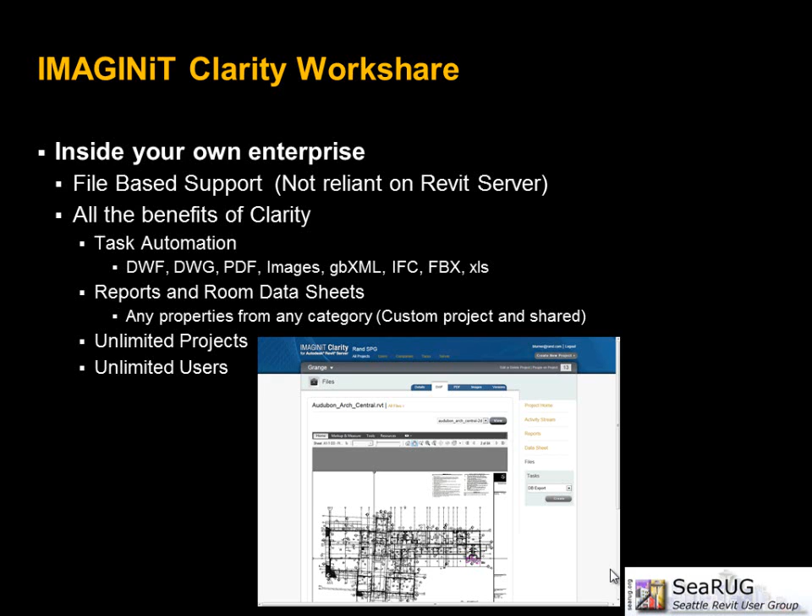Last time, I only showed one feature, and that was using the security portion of Clarity to control the Revit server. Because Workshare doesn't need Revit Server, that security piece has become less important with the Workshare version of Clarity, but I do want to show really quickly what Clarity is, more so than I showed last time.

First, Clarity is 95% a web portal for non-Revit users to access BIM information from your Revit files. I'm going to quickly log in as an administrator. While I do this, just take note that anything you're seeing can be accessed from anywhere you have an internet connection.

So here, I'm in as an admin, so I have access to everything right now. All my projects, I can edit, change, create, add, delete, anything I want. But what I want to focus on right here is our users and our projects. So right now, notice on my Clarity site, I have 4 projects running.

Maybe I have a user or a project manager that is only working on one project, and I don't want him messing with my other projects. That's one thing Clarity is able to take care of. I can come in and say, alright, this Bryan Cowles user is a little shady, I want to limit his visibility. Notice I'm only allowing him visibility to this one project.

Now, if we were using a Revit server, when I went into Revit, that's the only file I would see. I wouldn't see the other 3 projects. But because I am not using Revit Server in this instance, I'm just controlling this user's visibility inside of Clarity.

So I'm going to come up here, log out, and log in as that user. Notice that my interface is different. I don't have all those tabs up top. I'm not an admin, I only have access to view project data.

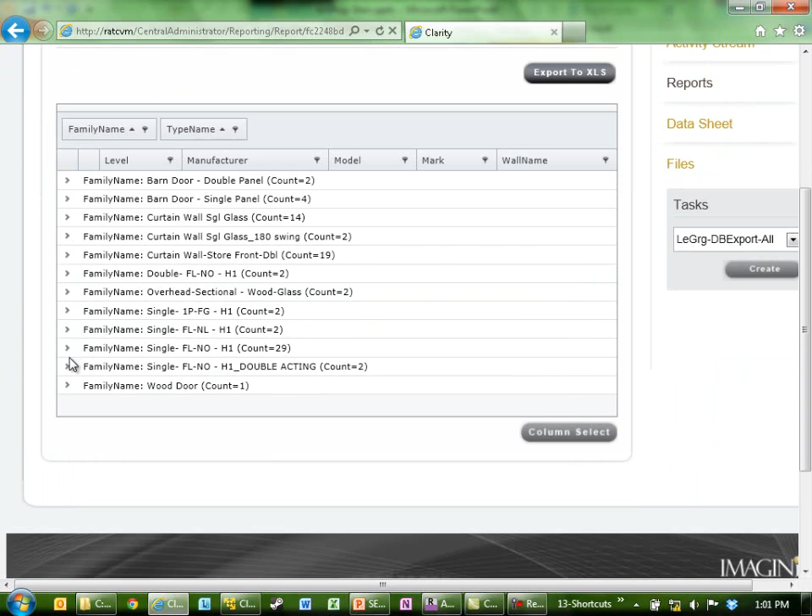So when I go to this architectural file, I can come over here and look at reports. This is the data from Revit. So if I wanted to look at a door schedule, here's all the doors that are in this project right now. I can expand these, expand further, and see all the information. This is read-only, it's not editable, but it is manipulatable.

So I can actually move properties around, sort by specific properties. I can come down here and grab more properties. So if I wanted to include fire rating, I'm just going to drag fire rating up here. Now I'm getting the fire rating of this component. Anything that I want to grab, we can use out-of-the-box properties, custom project properties, shared parameters, anything in the file we can pull out.

I'm also going to come up here and maybe look at a room schedule. So here's my room schedule.

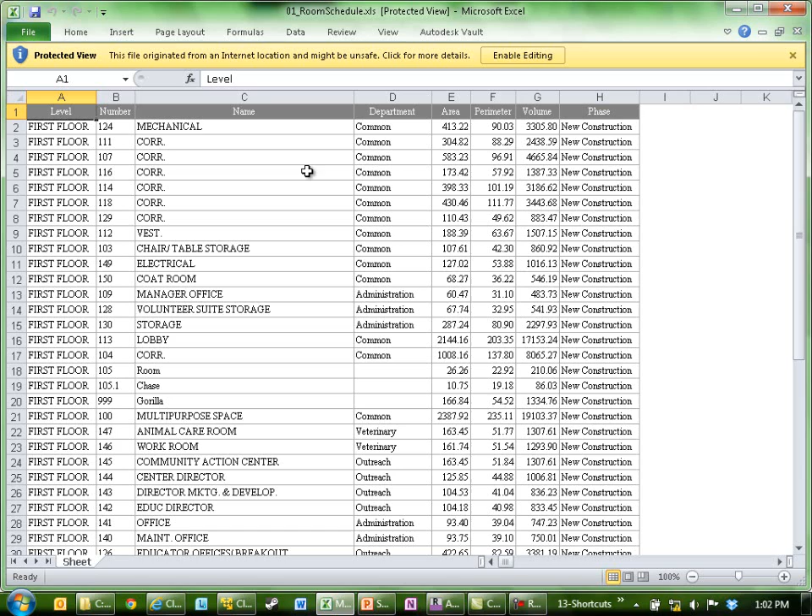Like I mentioned, the data is manipulatable. I can come up here and export this to Excel if I wanted. If I wanted to give this to someone who wants to do some analysis in Excel, I'll just hit open. And here's now a full room report from my Revit project in Excel that someone can analyze or do whatever.

But like I said, you can also just do straight manipulation here. If I drag department up, notice it's now grouping everything by department and giving me totals. So my administration is 1,212 square feet, and there's all the rooms in administration. Very good, easy access to data.

Data sheets. Who here does room data sheets? A couple people. Well, hopefully this is impressive either way. If I click here and say I want to look at my data sheets, I'm pulling these from the Revit model. As the Revit model updates, I can get this data update. It gives me an image of the room, all the properties from the room, finishes, square footages.

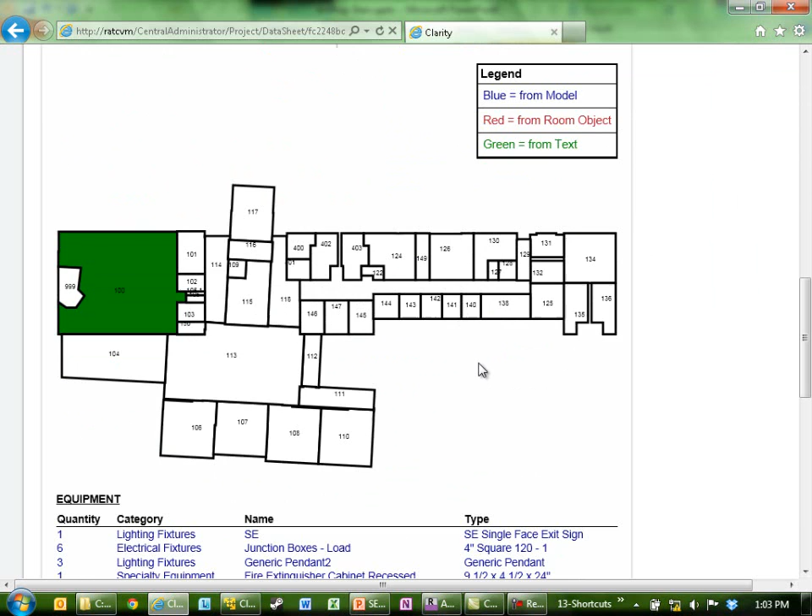We're tapping into linked files as well and pulling out what's in this room. So I have 6 power receptacles in this room. If I continue down, how about a convenient key plan highlighting where that room is? What equipment is in this room? What doors service this room? What furniture is in this room?

Again, this is all customizable. If someone is pestering me for sheets, I come back here to my architectural home and say, well, let's look at these PDFs. We are automatically generating these PDFs. Who here spends more than an hour a week exporting PDFs, DWFs, DWGs, etc.? This is all automated. I told it to do it every night at 1 a.m.

It spits this out, puts it on the site. Now someone can self-serve themselves, find the sheet they want, save it locally to their iPad or whatever device they have, print it directly from here. We're just giving these users access to this information without them needing to open Revit or bother a Revit user. If I come here to my DWF tab...

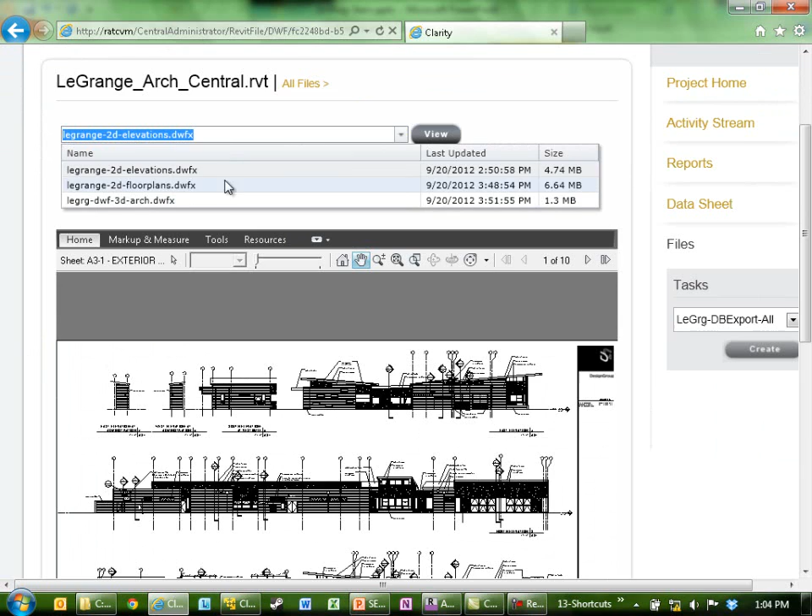I can look at these in DWF format. I can actually do separate exports—elevations, floor plans, a 3D DWF. And all I need to do is just click that I want to view these. We've embedded the full Design Review plugin in here.

So I can flip through sheets, zoom in on things, use my measure and markup tools, and say, all right, how wide is that door—there to there—36 inches, great. I can use the select tool and pick on stuff and see all the BIM data associated with these objects.

That's all I want to show right now, but we have the ability to just go in and say, hey, I realize the model changed today, I want to re-export everything. And I hit create. It's going to re-export everything, and in about 5 minutes, everything on this website is going to be up to date to the most current version of that Revit file.

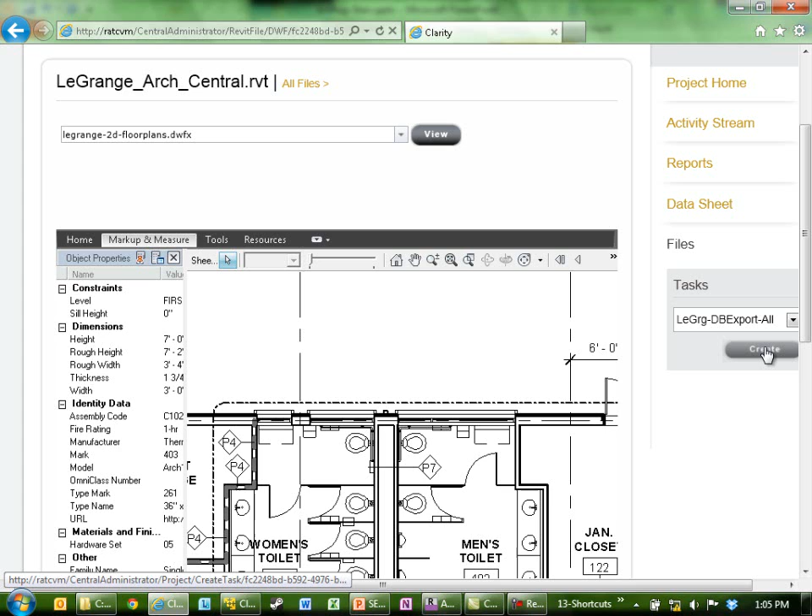So thank you for letting me go on a little bit about that tool. The big thing I wanted to point out is we are no longer reliant on Revit Server as the base of our technology. We can do this with any Workshare-enabled Revit file.

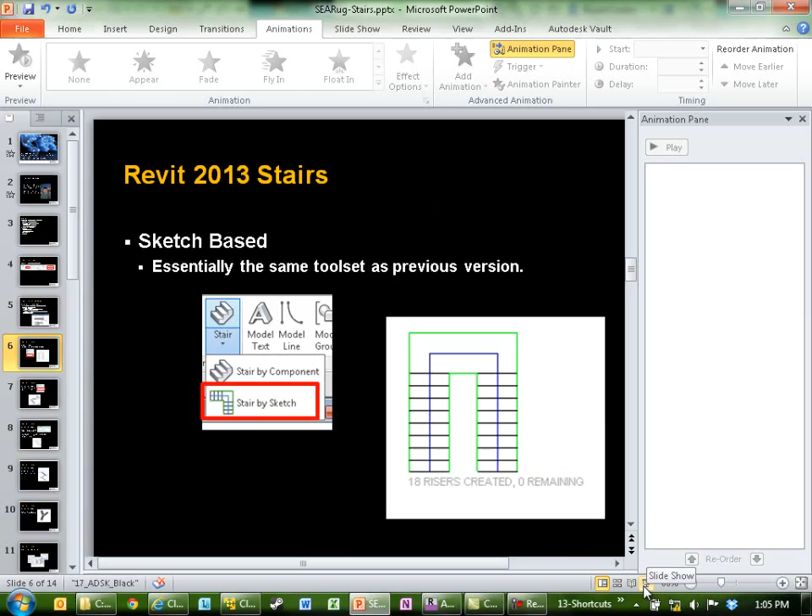So there we are. Let's jump into stairs, shall we? In 2013, the stairs tool got a pretty big overhaul. It has new component-based functionality that allows us to individually create and edit risers, runs, landings, stringer supports. Also go in and start manipulating very specific elements of the handrails. It's getting very, very good.

The image Rob showed earlier made me chuckle. It's not that bad anymore, but it is a lot better. We have a lot more customization abilities and control over what we've got in these.

So before I get too deep into the component-based stairs, I do want to point out that right here is Stair by Sketch. And when I pick Stair by Sketch, you'll notice it looks exactly the same as the old functionality. They didn't take that away and force you to use this new tool. They left the old functionality in there, so if you're comfortable with that, and not ready to adventure into the component-based stairs, and you need to get a stair out really fast, you can still use the sketch-based tools to get this information into your model.

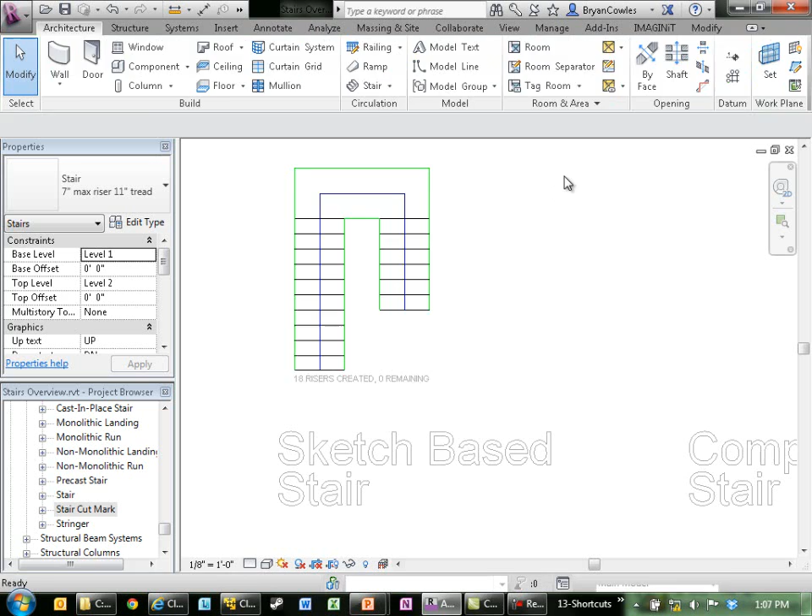Once I do this, I want to point out a couple of things. When I make a sketch-based stair, it is just like it always was. Notice if I hover over an object and hit tab, I don't know if you can hear that, my computer's yelling at me saying, nope, there's nothing else to select. I can select the handrails, but that's about it.

So this is where we can now move towards, oops, where's my slideshow? There it is. To this component-based tool. Now this is going to have a lot more options than you're probably used to seeing, and I'm going to try and cover as many of these as I can. Just like my presentations always are, if you've seen them, I like to start out basic and try and see how complicated I can get by the end of the 50 minutes that I've got.

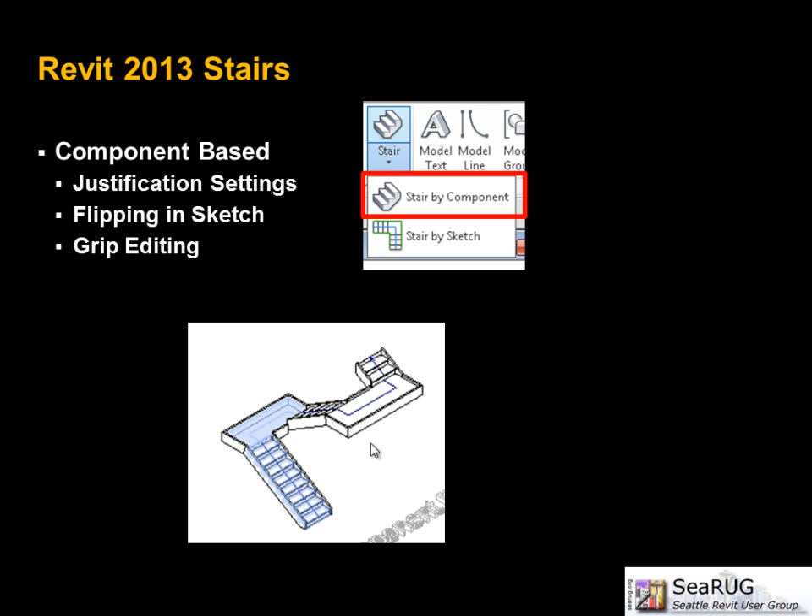So, stair by component. When I pick this tool, I just want to come up here and just show, just right here, stair by component. Pretty simple. It's right there with the stair tool. One of the first things is right here, location line. I can pick this right off the bat. I can't do that in the sketch mode still. But when I'm in this, I can say, I want this justified on the left side. If I know I need to follow a wall, well, put it to that side and follow the wall.

Now, as I go, some of these get squished up here. Notice we have very specific areas that we can look at. I have a run, a landing, and a support, so that would be my stringers.

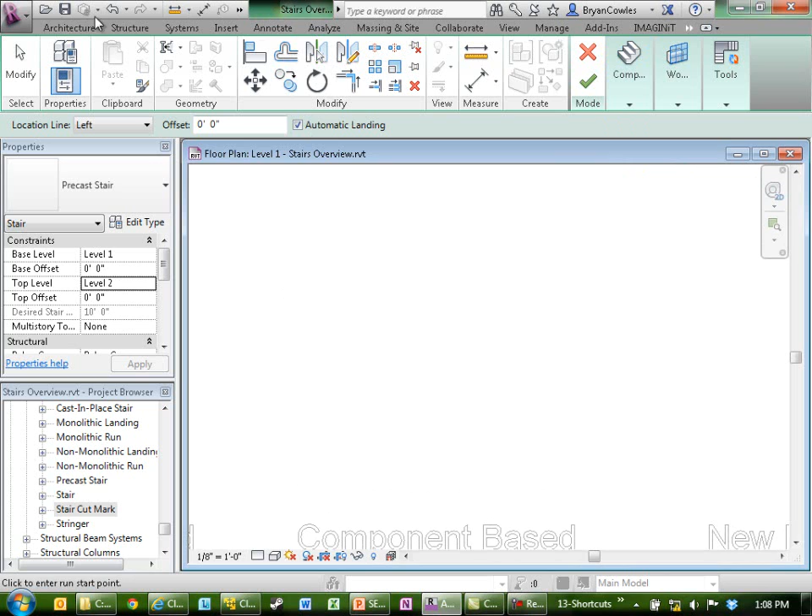As I sketch now, I'm going to leave this checked for right now, automatic landing, and I'm going to, let's open up a 3D view as well, because this is also something that is slightly different in the component-based sketch, is I'm going to get real-time results in 3D. So notice the first pick that I make, and the first run that I draw, it already is creating that as a 3D component. The next place that I pick, notice it's giving me a real-time preview of how it's going to treat this landing right now. So if I'm not liking it, I can kind of tweak and play with it, hit escape, and maybe try something else I forgot.

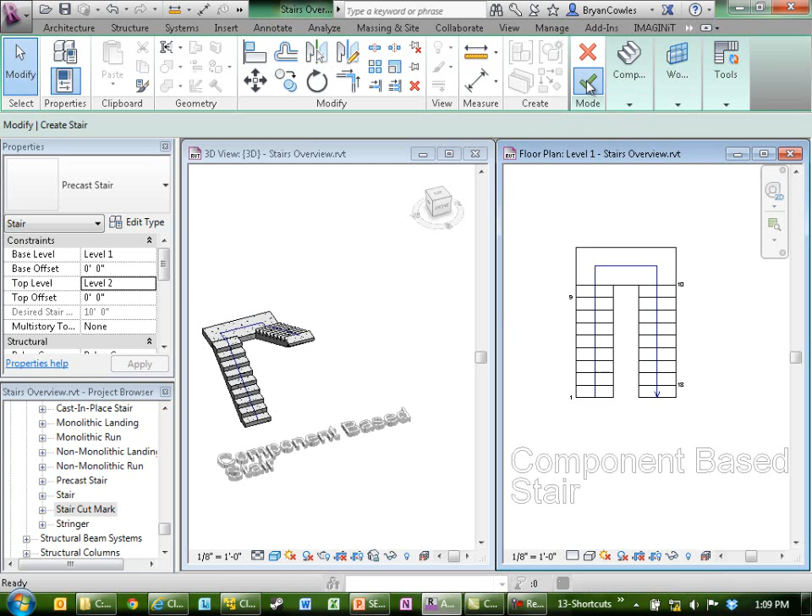I'm left justified there. But again, as I go, I just have all this visibility into what it is I'm actually creating. I didn't even finish the stair yet, notice. But I am immediately seeing different results as I go forward. Once I come up here and finish this stair, now it's going to go through and add the railings, anything like that.

Now, notice when I come in here, I can select individual pieces. So I can select just that run. Hit tab, select just that landing, and start to edit different properties and areas of these components. If I scoot over a little bit,

do another stair by component, and say an assembled stair. Oops, I keep forgetting I'm left justified. If I use this assembled stair, there is very convenient grips now that I can use to edit this. If it didn't make the landing wide enough, I knew I had a wall back here, well, I can just kind of grip edit that object now. If I grip edit this over here, notice it's individually editing the landing itself. So you do need to be aware of some of these differences as you're editing these.

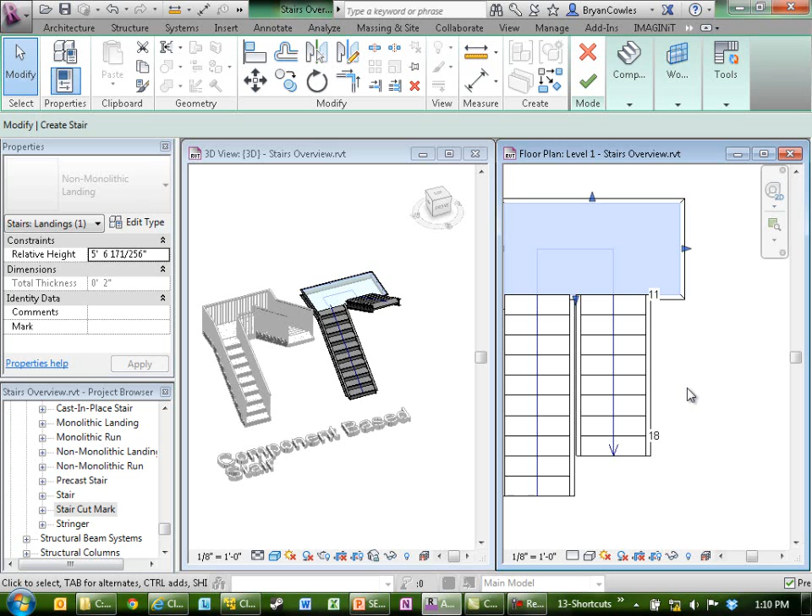Now I just need to grab the stair here, and notice it's also got a convenient stretch grip, but this is another thing that will get you. When you edit the actual width of the run, it pushes the landing out with it. This caught me off guard a couple times. That's why I wanted to show you that these are some things that you may get hung up on as you're working. In that case, I'm just going to come back in here and simply stretch that back. So again, very easy, very simple to just start manipulating some of this geometry.

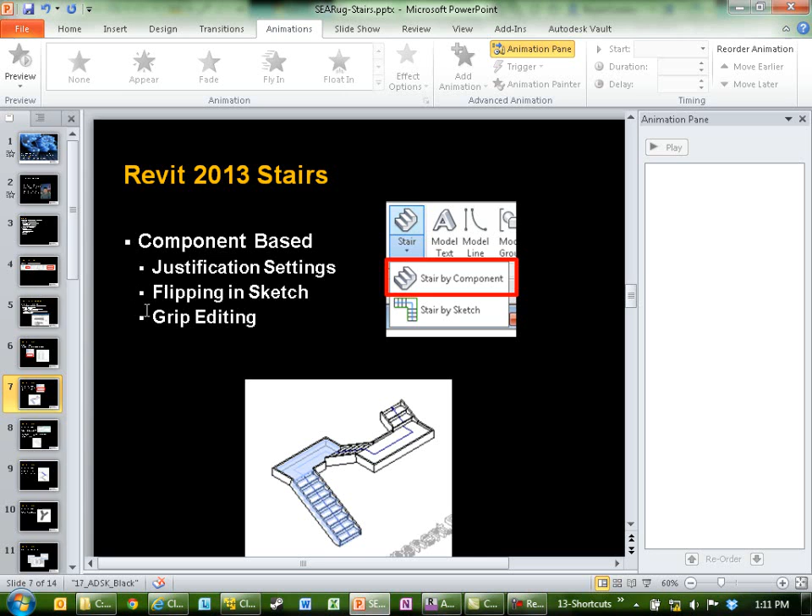So again, that's some of the very basics of this functionality. Something that's nice, I kind of skipped over it here, I forgot, to be honest, is you can actually flip the stair while you're still in sketch mode. As you noticed, I was able to see that 3D model going, and if I realized, well, my up is down and my down is up, I'll just go ahead and show where that's at. Right here, flip.

And again, it's just going to flip that. And again, I'm still in sketch mode. I haven't finished this stair yet. So again, I can just come up and go to these tools and flip that stair. Go ahead and hit finish. This is where it's going to finalize the stair, create some handrails. Apparently our line's too short. I'm going to guess it's that little piece right there. That's fine. All righty.

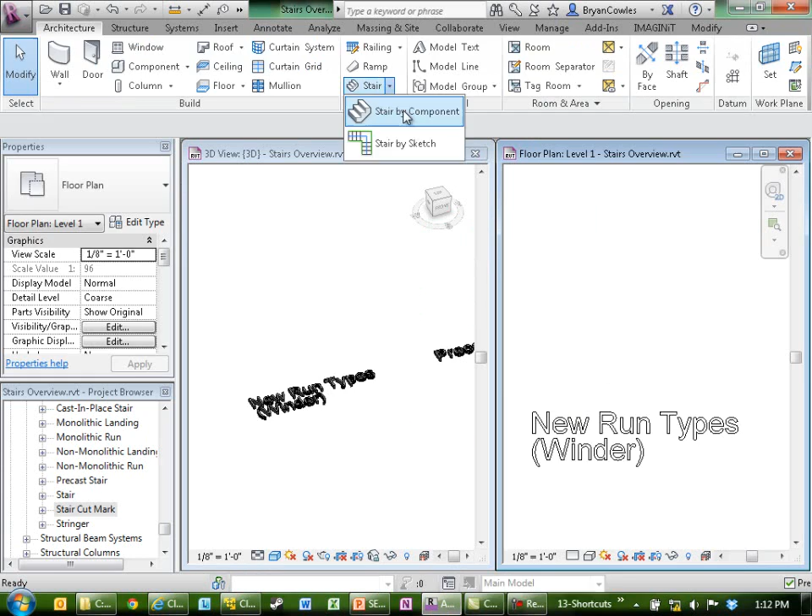Let's take a quick look. When I go to my stair tool by component, I can see I have an L-shaped and a U-shaped winding stair. If I pick the L-shaped, it defaults to equally space that stair.

Now when I go ahead and place it, I could use my spacebar to rotate or align tools. As I grip edit this, notice it's pulling from both sides. So if I needed to misbalance this and have less at the bottom and more on top, I just grip edit and it automatically pulls and retracts those stair conditions. If I needed to flip this, I can flip it before ever finishing the sketch.

As I continue, notice it does a little bit of a goofy thing here. I was wondering why it's doing this. It's trying to keep as many of the risers as it can in line with some center point out here, so notice these stairs aren't parallel as we're going through, and that's a little annoying.

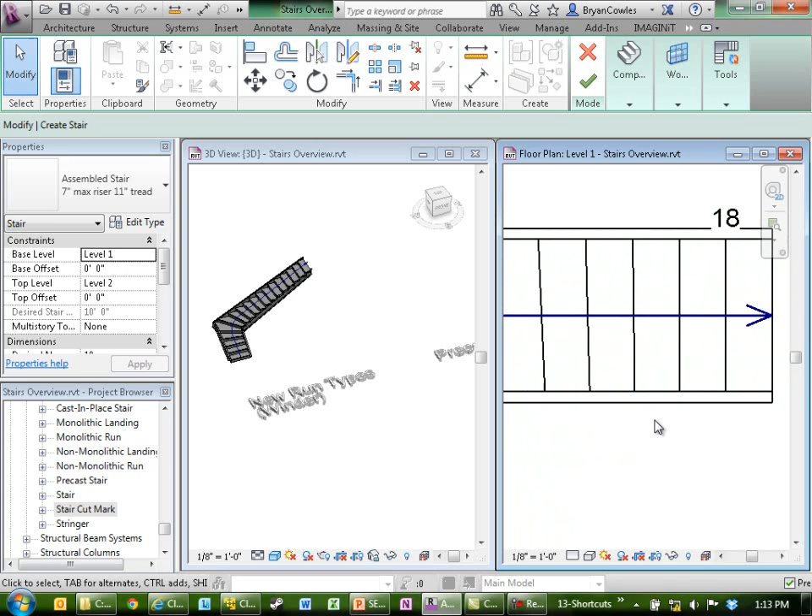But it's just a matter of selecting the stair itself, and in my properties I can put in a minimum width, which is what it's trying to achieve - it's trying to keep a minimum width as it goes. That's why some of them are getting angled.

But I have these parallel treads at the start and at the end. So if I know these last 8 stairs need to be all parallel, I just come into here - let me select my run - and say my parallel treads at the start, at the end I want 8 of them. There we go, now my 8 are parallel, and then it starts into the winding portion of the stair.

So that's another little property that's going to catch you if you're wondering why all the stairs are at an odd angle - that little property there.

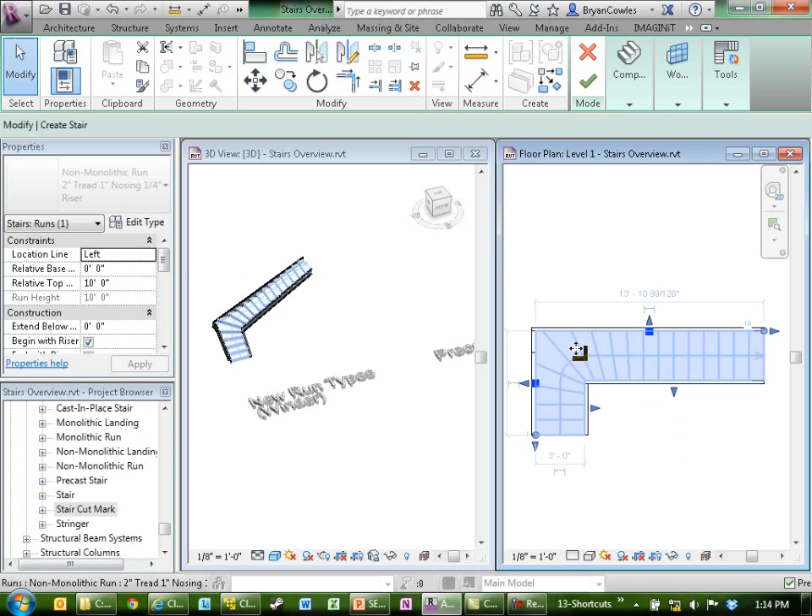Another trick: notice when I have nothing selected - I've hit escape a couple times like any CAD or BIM user is apt to do, hit escape 12 times more than necessary - when you don't have anything selected, those properties aren't here, so you'll be looking for them and won't find them. Make sure you come in and select the component of the stair you're wanting to manipulate. I come in here and those are the properties that I want.

Now as I come in here, notice it gave me just a 90-degree corner at my inside corner. This is another property where I have to select the run, and I can come in and say I want a fillet on the corner. Once I activate that, I can specify the radius that I would like.

I put too big of a number, let's try a little smaller, 18 inches. Oh, still a little bit too big. I'll just try 1 foot then. There we go, so now I'm able to quickly put a radius on that inside corner.

So a couple of these properties you may not realize right away because you don't see them unless you actually have the run object selected.

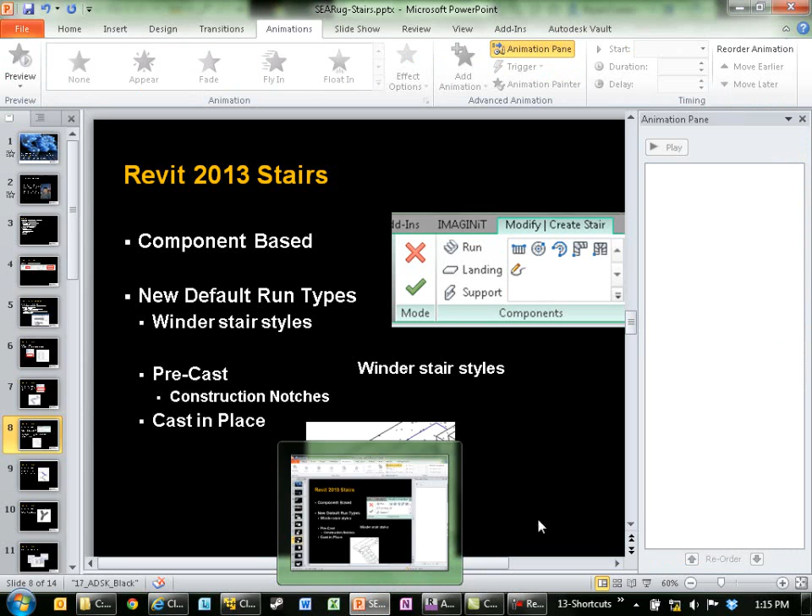All right, now back to the old PowerPoint. So those are those winder stair properties. You'll notice very similar properties if I did a U-shaped winder. I'm low on time, so I'm not going to go through that one.

We do have a couple of new stair types, and these are only applicable if you are using the component-based tool. One of them is - I actually forget which one it is - if it's precast or cast in place. We'll go ahead and peek at that.

Finish. There we are. Well, it's just Revit's way of saying slow down, be patient.

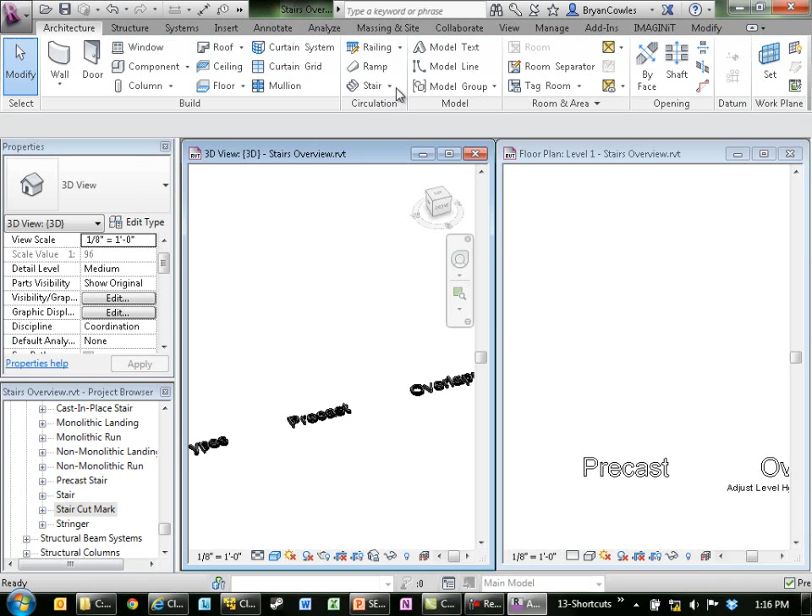Right over here, we're going to look at the precast type. I mentioned that not all of these are available in the stair by sketch, so I'm just going to show this really quick. If I go stair by sketch, notice I have just stair, and it's giving me a monolithic and my typical assembled 7-inch rise, 11-inch minimum tread stair. If I were to do stair by component, notice this actually has very specific stair family types. I have the assembled stair, which is the 7-inch rise, 11-inch tread, but I also have a cast-in-place stair and a precast stair. Now these ones each have a couple of additional properties that we can use and manipulate.

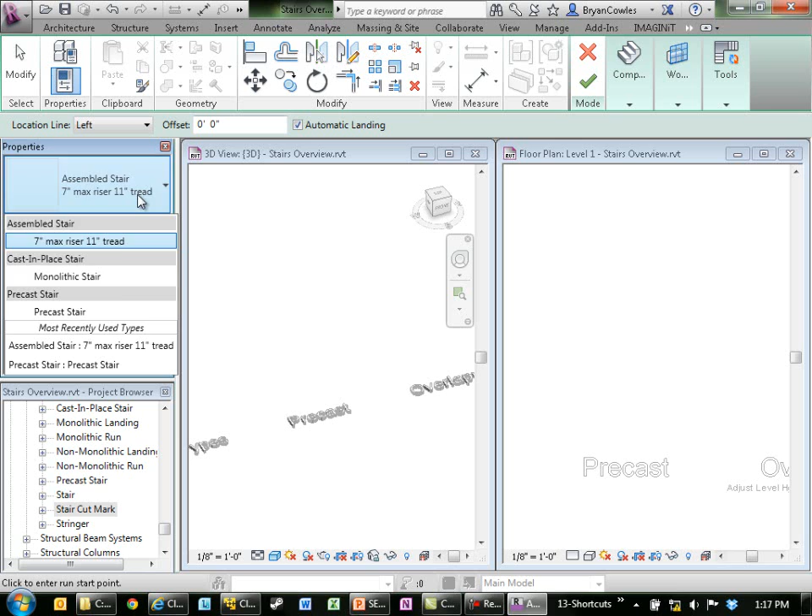So if I came here and said, all right, I want to do this precast stair, and I'm just going to kind of do a quick U shape. Oh, I left it on assembled stair, thinking there shouldn't be any stringers on that. Precast. Run. And come up here.

This one actually has a little bit of a notch condition at the top of the stair. Now this is on by default. I can quickly turn it off. I can also adjust what side I want it on, top, bottom, both, just by going into these properties, allowing me to have that little bit of extra detail about how the construction is really going to happen.

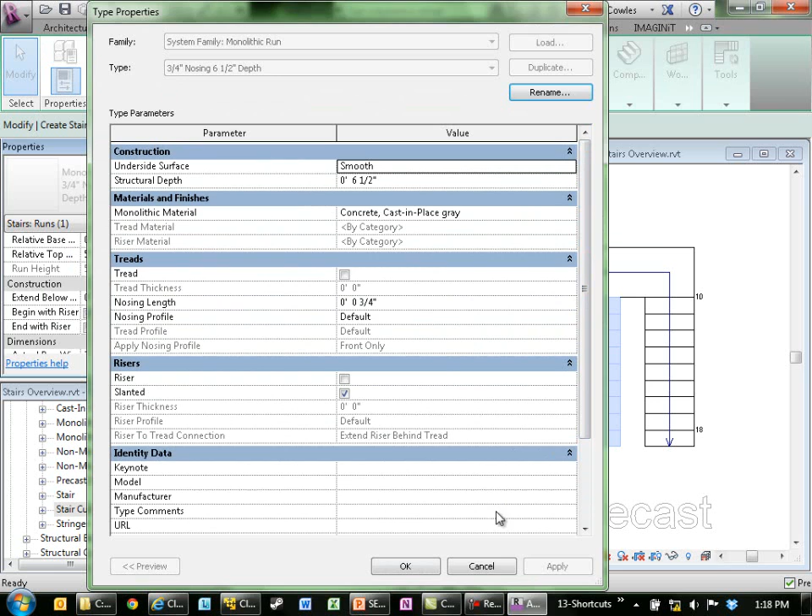All I need to do is come in here and say edit type, and maybe it's not the type properties. Oh wait, this is a full stair property. So these are the things that are going to get you. The last set of properties I showed, I had to select the run. This one, I have to have everything deselected, because when I come here to edit type, here's my notch conditions.

Do I want a straight cut? Do I want it notched? What size, what thickness, what extension distance? Do I want one, what my gap distances are? So we have all these different properties that we can start to examine, look at, and manipulate.

The real trick here, as you've seen, is do I do it with nothing selected, or do I have to have the run selected? Well, I found there isn't a good rule of thumb for either of them. You just need to experiment. Just realize if you're not finding what you're looking for, select something. If it's still not there, deselect something, and it will be in usually one of those two areas. So once I've done that, well, there it added another rail for me. And I can continue forward.

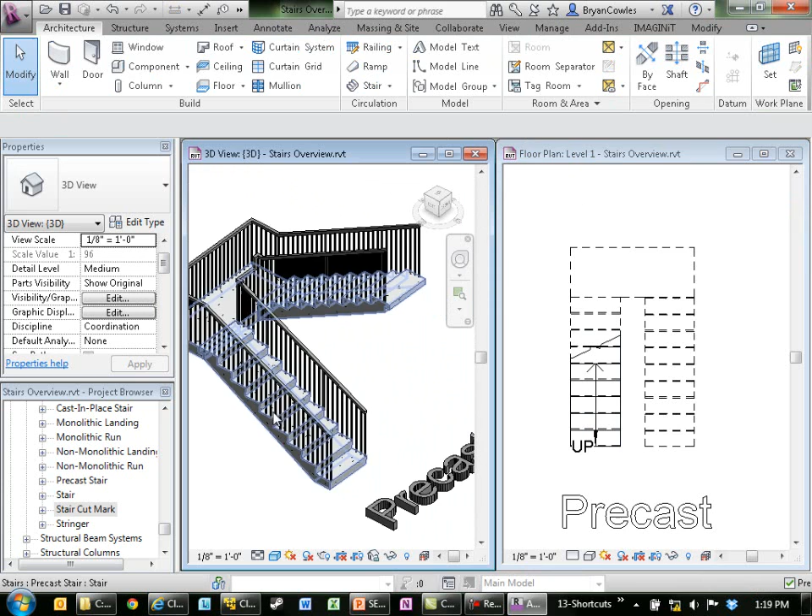So with stairs, and specifically these component-based stairs, we're no longer constrained to the 2D sketch and not being able to get a sketch above a sketch. Has anyone here ever tried to draw a stair that to get the full height had to wind on top of itself? So what do you have to do? You have to draw a stair and get kind of to the point where it's going to overlap and you stop. Then you draw another stair and make sure you've got your offsets correct and you continue the stair going forward. Well here, if you're using the component-based stair sketch tool and you know I need to go all the way up there, there's no landing between them, but I'm going to wind amongst myself, I can go ahead and do that and have overlapping runs.

The most difficult aspect of this in the old functionality was doing winding or spiral stairs, because those almost always will wrap upon themselves. And you had to do 2, sometimes 3 separate stairs just to make one stair. It made no sense. Now we can do this very quickly, very easily. Now I'm going to cover a couple topics with this one.

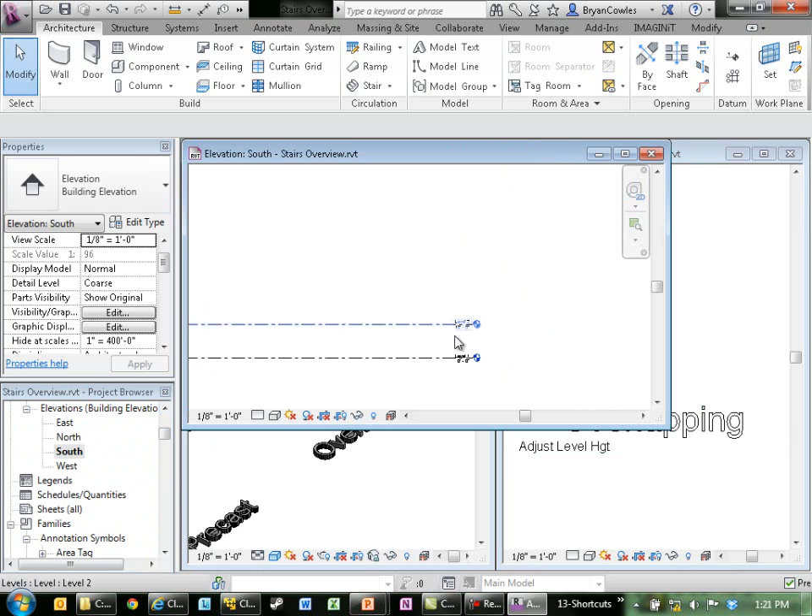When you have 2 runs, you can have Revit automatically connect them with a landing. Now this is a tool here that is just a checkbox that I want to get. So ignore the error I'm about to get, because I'm going to say that maybe this is an 18-foot floor-to-floor height. It's going to yell at me, I know it, saying my stairs no longer make it to the level. That's fine.

Or I may just crash Revit. I've come to find out whenever Revit goes gray and it says not responding, that's a code. That's a secret code from Autodesk saying, be patient. Be patient. That's the, hopefully it's going to come back. So there it is. So there's my not responding. There it was. Just be a little bit more patient, and here we go. So it's working.

Okay, so what I'm going to do while it's thinking, I'll talk about what I'm going to do before I do it, is, so that's fine.

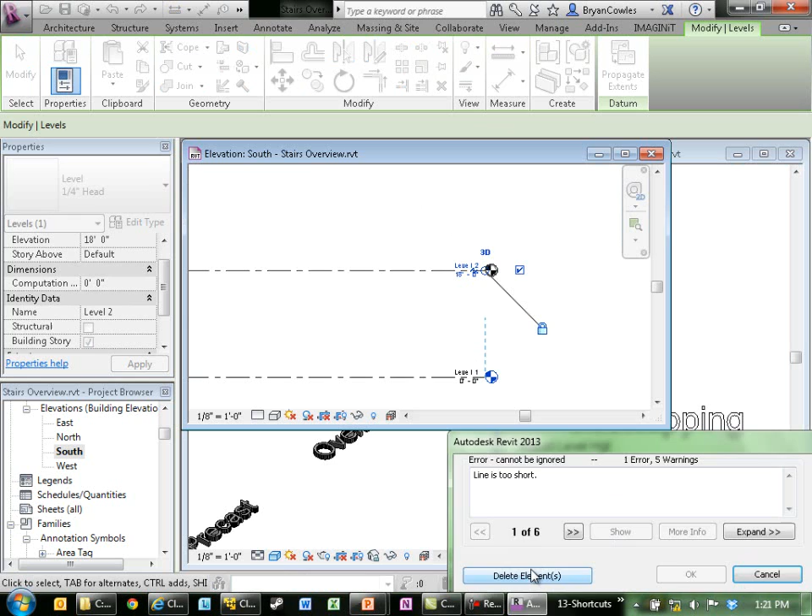Now, when I come to do this overlapping stair, I am going to combine two techniques into one just to save myself some time, because I still have, hopefully, a lot to get through here.

I'll just put this to center. Now, there is this checkbox right here for an automatic landing, and that's what it was doing before—it was assuming that I wanted a landing. If I turn that off, I can actually come in and draw a run.

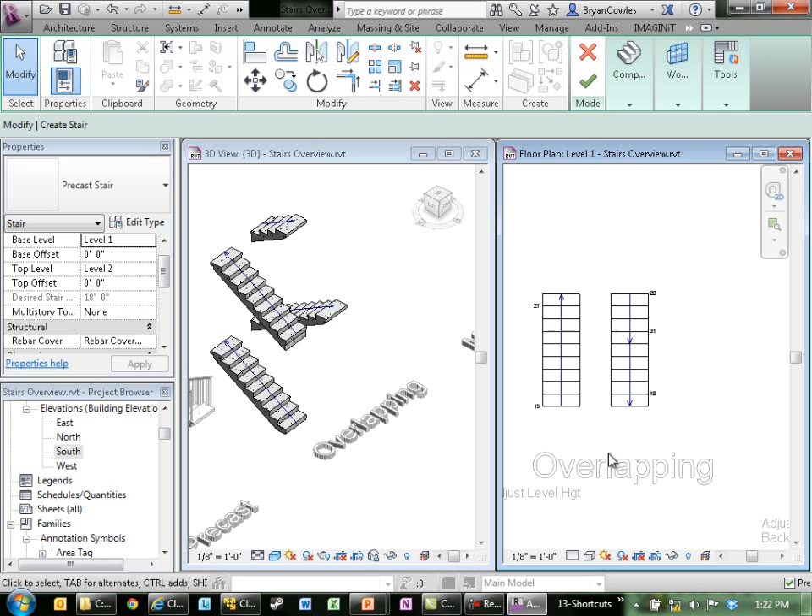And draw another run. Notice I can just come over here and draw another run, and come over here and draw another run. So it was able to just keep going. I didn't have to exit the stair, complete a new sketch, and start from where the old one ended—I can just keep on going. As you see, it just came in and stacked them all on top of each other here. So I've created a couple different runs.

I'm going to do one more thing to show you another gotcha. I'm going to go ahead and finish this, and I'm just going to add one more component stair over here, just something like that.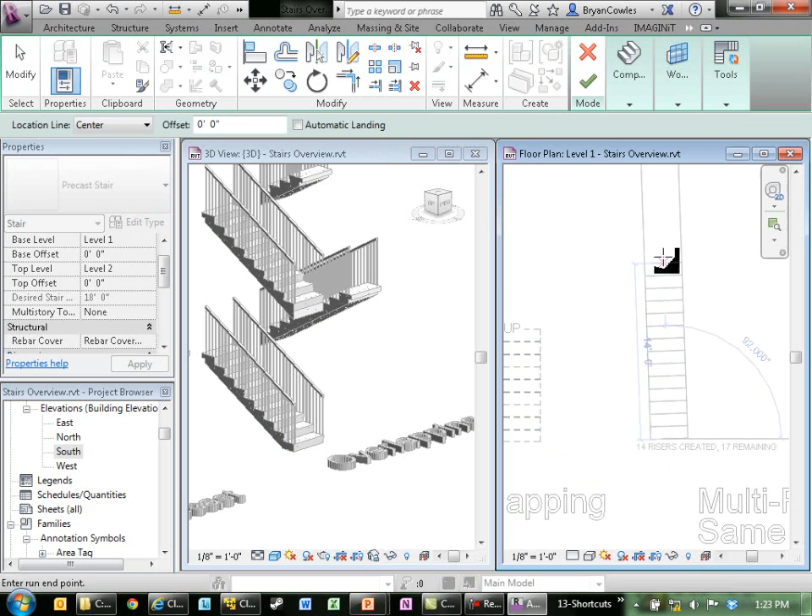Now I'm going to edit this first stair. So when I come in and say Edit Stairs, notice I still have all of these component-based tools available to me. The one I want to show here is landing. Now, in order for Revit to make a landing, it has to be in the same stair component object. So notice I couldn't create a landing between the bottom of this one and the bottom of this one—it won't let me do that. So that's a catch, just pointing out that's a limitation right now.

If they're in the same stair design, or the same stair sketch is kind of a loose term at this point, but as the same stair sketch, as long as they have either two tops that are the same or a top and a bottom that are the same elevation, I can just say I need a landing between that one and that one, and that one, and that one, and that one. Whoops, getting a little fast with my clicking. But you see, I'm just connecting different objects amongst themselves here.

So very nice functionality to kind of plan some things out with the original tool. Maybe limit what I'm showing right now. As we figure it out, I'll add in landings later.

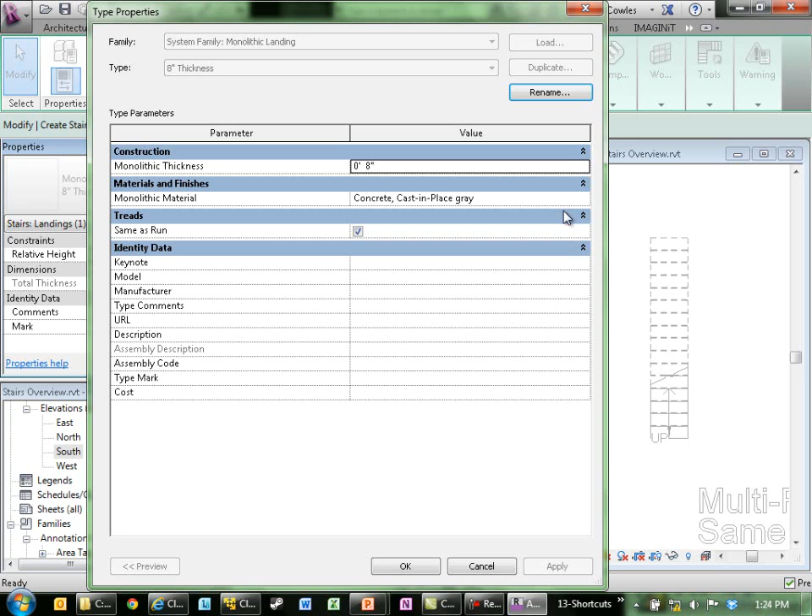And just to show, these landings are their own objects. So I can give them a different thickness at each landing if I needed to do that. I can give different material if I wanted. So again, these are all individual components as part of an overall larger component as we go forward.

So go ahead and finish that off, and continue forward. It's kind of giving me some handrail things saying I had to extend to meet, things like that, which we'll talk about in just a little bit.

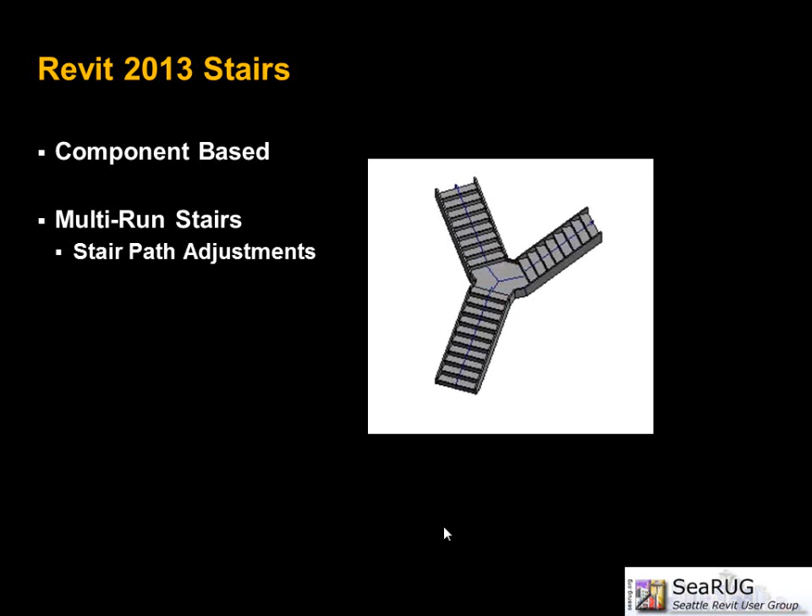So let's go ahead and delete this. Multi-run to the same level—so if you have essentially one stair system that is not just one set of stairs, it may be branches, or it's two that meet into one, we can still do this type of functionality within the component-based stair tool. With the sketch-based stair tool, again, you'd have to make two separate stairs and kind of play with the settings and this and that. But this is going to be initially created but then modified using a sketch.

So you can take component-based tools and convert them to a sketch so that you can easily manipulate them from there. So what I'm going to do is say I want a stair by component, and I'm going to pull this up, maybe say 10 there, pull this up, and I'll just go to there. That's fine.

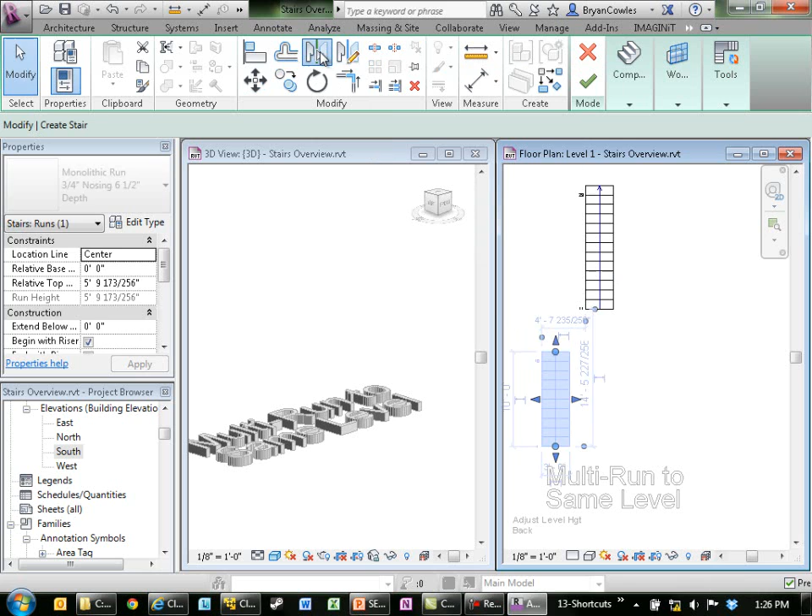And then I'm just going to grab this one and just use my basic modification tools. So I'm going to say, all right, I want to mirror this across that run. Notice it kept the tread counts the same—it didn't try to make this stair 24 going up. So I was able to take two separate stairs, and I just mirrored one of them. I could have copied it, anything like that.

Now I'm going to come up and say, all right, I need a landing between this one and this one. Now notice I can't say I also need a landing between this one and this one, or this one and this one—they already have their landing. So this is where I now need to say, okay, how am I going to get those two landings to meet with the big one? So this is where, if the situation applied, I could grip edit this one and be fine like that.

But this is the problem I'm going to have, and I actually did it with an incorrect stair type. If I did one that had stringers on it, left at the concrete stair, it would actually continue the stringer all the way through and up and over. So instead of just stretching that, here I'm going to come up and notice there's a tool that says convert. Any stair component I can convert back to its original sketch that would have been used to originally create this geometry. So I'm going to say convert.

Now, that error, I should have left it up. I clicked through it really quick, as I'm apt to do in Revit. Well, warning, I'll deal with it later - which, by the way, clear your warnings out every week at a minimum, just a suggestion. But once this is a sketch, I cannot go back to a component based stair unless I delete it and recreate it. So just be aware of that.

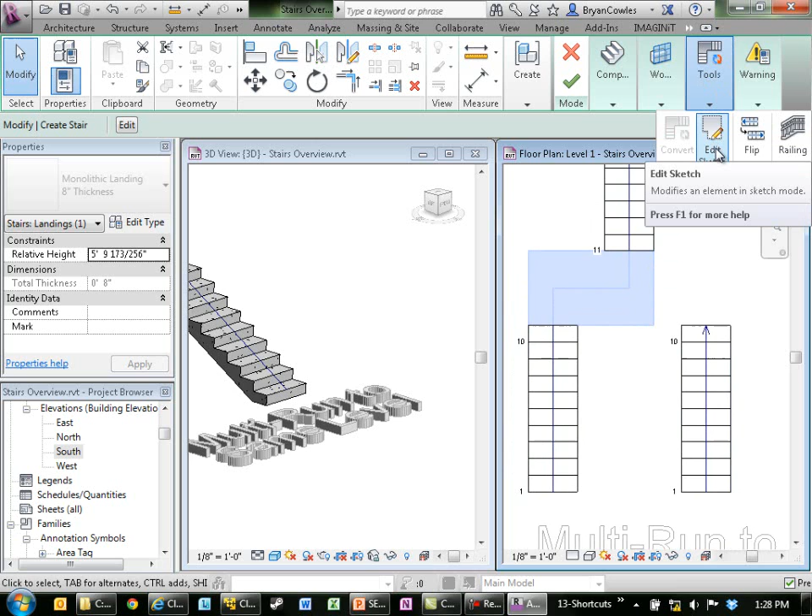Now that I have this as a sketch-based tool, I have the ability to edit this sketch. So now if I come through, I'm going to grab this and pull it over. Actually, I'm going to just use the Align tool - there to there. And trim, and finish.

I wish I would have left it at the assembled stair, because you would have seen that the stringers would have cleaned up at the top of that stair.

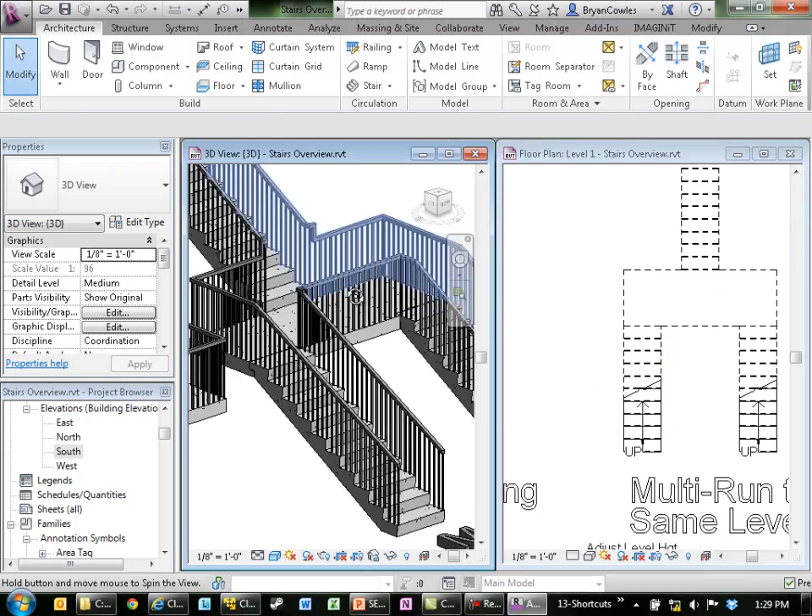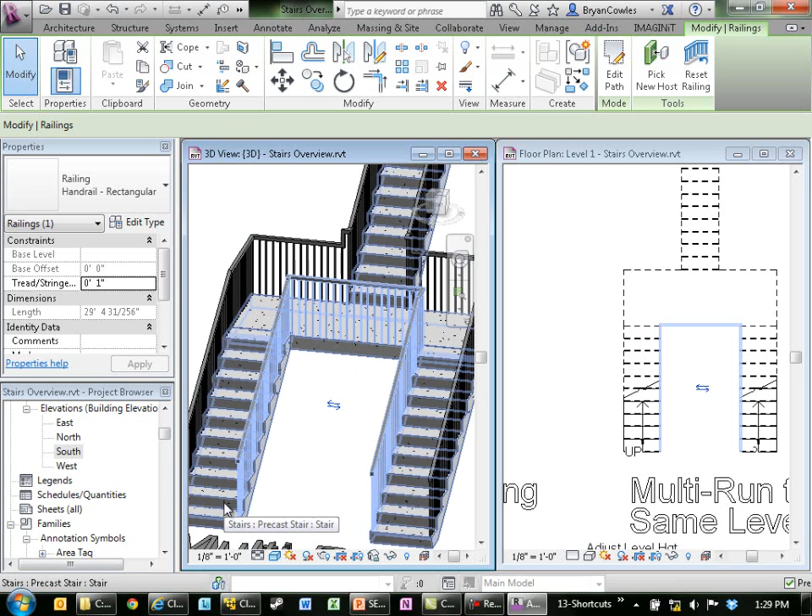Now, another thing that's kind of interesting is this run line. When I go ahead and finish this stair... I'm not sure what that error was. Oh, actually, this is a great example. So instead of showing it with the stringer, you can see it with the handrail. Had I done it that first way, the handrail would have been blocking the top of that rightmost stair. But because I switched it to a sketch, it realized that those two needed to stop, and notice it actually made this a continuous rail. They were originally two separate objects, but because they were all based on this one component-driven stair, it understood how to handle at least the handrail in these unique situations.

Alrighty, so let's see where I'm at. All right, stair path adjustment. So if I come in here and edit my stair again, right here on the run, if I pick there... I'm just going to, whoops, excuse me. When I pick run, right now the stair doesn't quite recognize this other piece over here, as you can see, and this can actually have some negative effect when you're trying to adjust the display settings of the stair.

If you wanted the cut planes to work properly, the different displays, hidden lines, or however you want to show your stairs, this can actually make this one on the right look a little different, and you may not want that. So what we'll need to do is pick - I need to do a new run, and then it gets into this boundary, riser, or stair path, and I picked run, and then the tool I picked was this one right here, sketch. So I'm going to sketch this, and there is this new one here called stair path, where I can actually say this needs to continue.

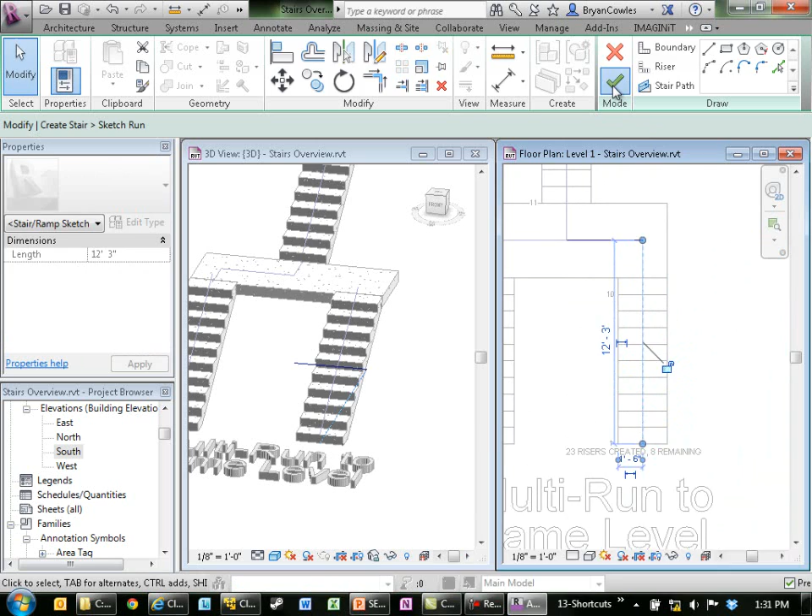Apparently I can't draw a straight line either. And we'll go ahead and connect those in. Go ahead and hit finish. Interesting. Need to pull that all the way down. Can't create this run by sketch. I must have missed - looks like I'm off just slightly. No, it's not snapping for me.

Well, as you see, sometimes live demos just don't work out for you when you're trying to do them quick. But this will help when it comes to manipulating how these stairs are going to look when I start altering visibility settings, visibility graphics, type properties, things like that.

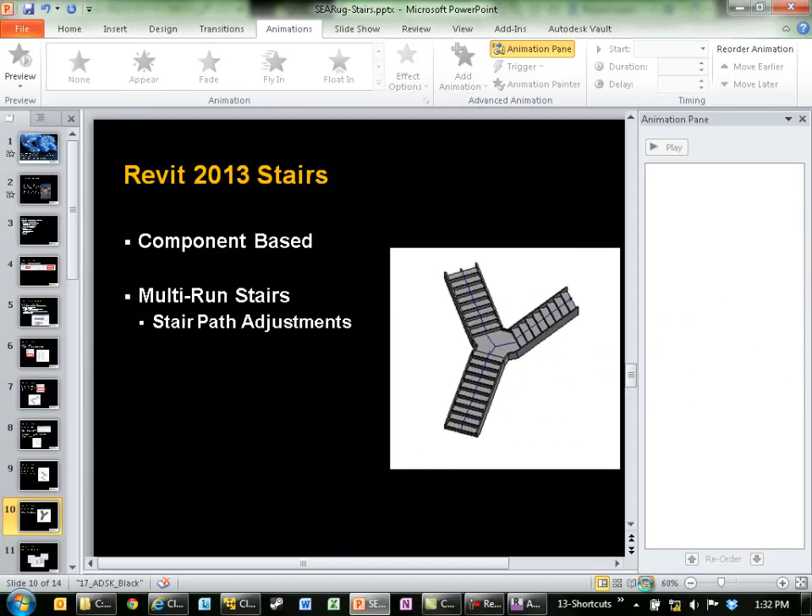Now, speaking of, I think that's my next topic. There are some new stair display settings, so we now have a little bit more control over how they look in our plans. Some of these are nice, some of these aren't - I wish there were still a little bit more, but we're getting better here. Some of these were user-generated, so I do recommend if you've got something that's just still driving you crazy, put them on that wish list, because these were actually a big item on the architectural wish list.

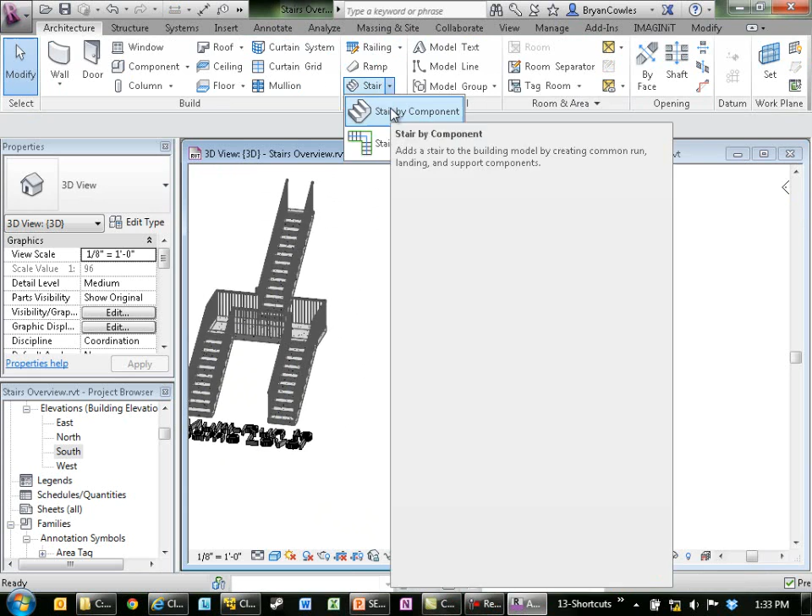First, I'm going to make a stair that's not the precast - stair by component, make an assembled stair, and I'll just throw it over here. It's a long stair, long straight stair, no landing. Code - who follows code?

So we have these new display settings. There are several of them. Some are in the model visibility graphics, some are in the annotation visibility graphics, and some are part of the type properties of the stairs. So they're all over the place. Let's take a look at these.

In my plan view, if I go to visibility graphics, on the model categories tab, this one's easy to find under the stairs category. There's this new series called 'above.' I can now individually adjust what things look like below the cut plane and what they look like above the cut plane. So I could say I don't want to see the riser lines, I only want to see the nosing lines, or vice versa.

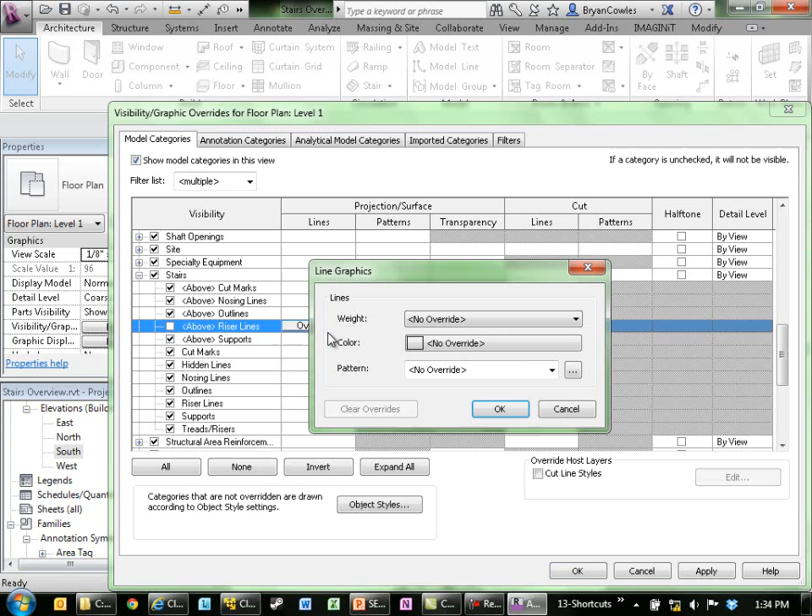I don't want to see the supports above the cut plane. I want to change the line type of these above the cut plane only. So I'll just make them red - some sort of change. Oh well, I turned them off and then changed the color, it figures. So I'll turn off the nosing and have red riser lines above there. So again, you now have these individual little tweaks and controls to adjust how these look.

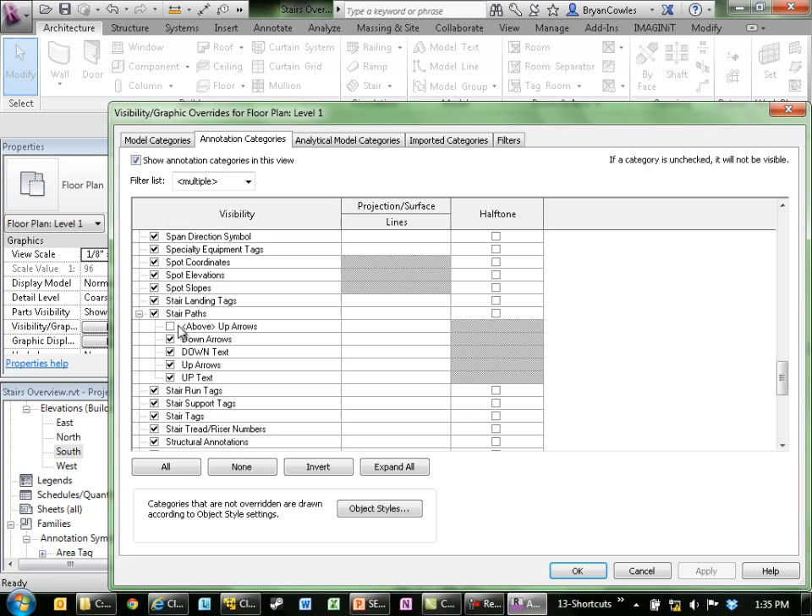If I go to my annotation category, there's one called stair paths. This is specifically regarding that path line. This is where that last step I was talking about can have an adverse effect if you don't adjust that stair run, because we're now looking at that path. So we now have above the cut plane, do I want the arrow to continue? This is just a simple yes or no, and it's got some basic overrides.

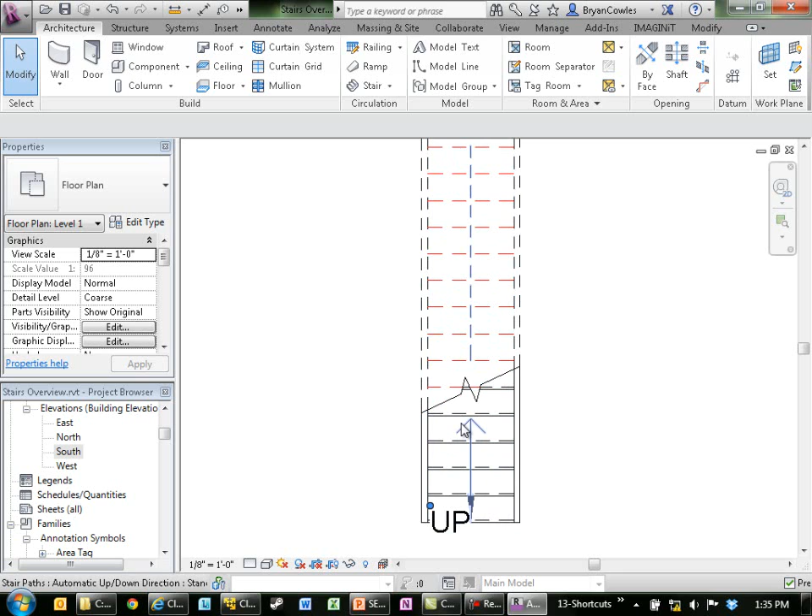But now you see, once it hits the cut plane, it continues with a different arrow. I can adjust what it looks like, what line types, anything like that if I wanted to match it. It's still a little annoying that it splits them here. If I wanted them to be continuous, I haven't found that setting yet. So it's 2 arrows instead of 1, but I can at least get it above this cut plane.

And there we are. The next one is in the actual type properties. So if I select the stair and go to Edit Type, we have this area called Graphics. Now I have single zigzag. The 2 that come out of the box are single zigzag and double zigzag, but when I dove in here, I'm thinking, oh, could I customize this? Yeah, kind of. You have 2 choices, a zigzag break or an arced break.

But you can also now specify the angles you want, how wide they are, the symbol size. And again, I mentioned you can have a zigzag or a curve. So I just made a new type for a double zigzag, one for a single curve. So now as I come through, I could say the cuts or the graphic style I want is that double zigzag.

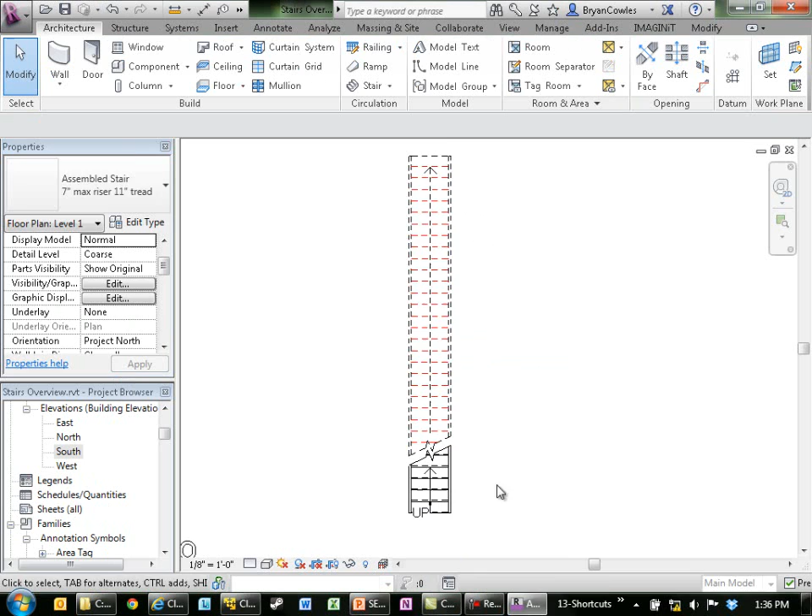So now you see it throws in a double break in there. Or if I select the stair, come back in here and say I want a single curve, you can see it gives me a little curvy break symbol.

I tried digging into the family tree to see how deep I could go in editing this, and I found that here is the stair cut mark. In the family tree, it's under stairs, but notice there's no edit family button. I was trying to say, could I make this whatever I wanted? So unfortunately, not right now. Maybe in the future. But we've got a little bit of customization there.

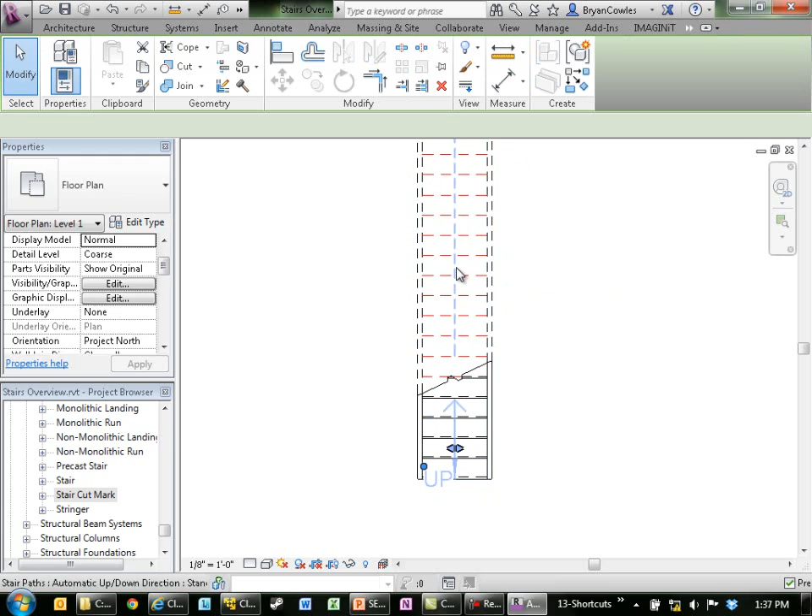The last one - this is a new system family, you can't really manipulate these other than the basic properties they give you, but notice I can hover over and hit tab, and I can actually select the stair path itself and start to manipulate how I want this to look. Where do I want the up text? Well, I normally couldn't do anything with this, either on or off, but I can say I want the up text up here or up here. I can just manipulate this wherever I would like.

I can come over here and say show the text. I can go to Edit Type and start to adjust, okay, what arrow types do I want? Do I want an open arrow? Do I want the arrow, instead of just being this much of the stair, do I want it to go the full width of the stair? That's what this little check mark does. So now you see my arrow goes the full width of the stair.

Again, just some of these things that are interesting. I added an arrowhead to the bottom as well. That makes no sense, though, because I'm now pointing two directions. Let me go ahead and say none.

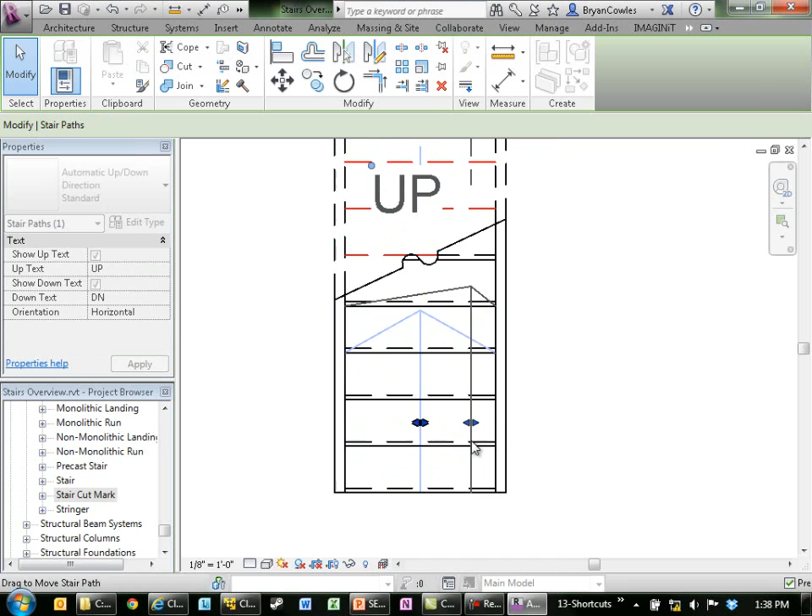So again, you have this manipulation. Also, if you don't want this centered, you can just edit this, although notice what happens when you have the full width arrow - it does some interesting things there. So maybe if you're going to have it off center, say I just want an 1/8 inch arrow there. But again, you just got these slight graphical manipulations that you can do to get these maybe feeling and looking a little bit more how you prefer them, or if you had something right there that you also needed to show, to not have overlapping lines or geometry.

So that's just some of the graphical settings that have been implemented into the new stair functionality. All right, so, whoops, wrong button.

Stringers. Who here has ever tried to use a C-channel profile as your stringers? Well, in 2012 and previous, it was a bear. In fact, the best way I found to do it in 2012 or earlier was to literally build a handrail that's at the bottom of the stair that goes up. That's really the only way you could do it, because you could only use a rectangular stringer. That's not the case anymore.

We can now use any profile family as a stringer now. We can also add or remove individual stringer elements on a stair.

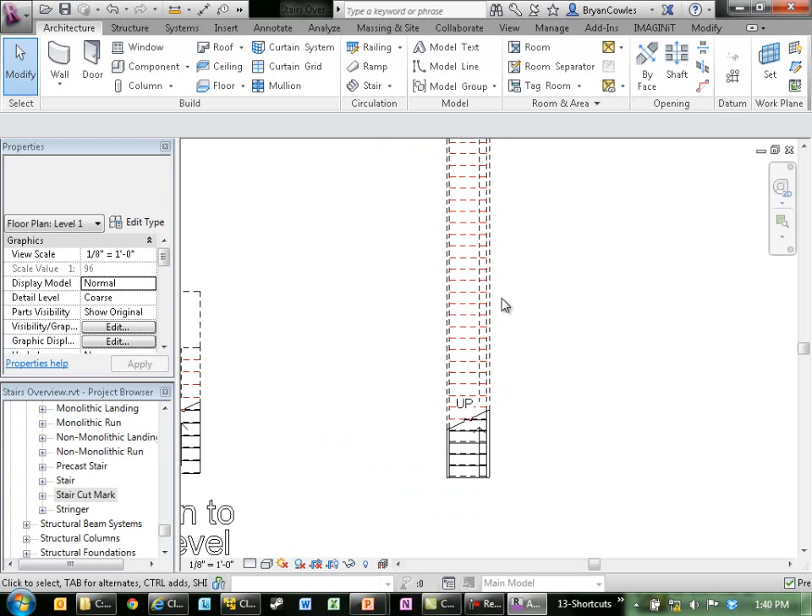I'll delete this one and I'll just build a whole new one. Another save reminder - I hope you don't click cancel as aggressively as I do in your office. Hopefully you are actually saving your files at certain points.

Oh, it didn't give me a landing either. So remember, if you're drawing runs and it's not giving you a landing, there's your checkbox right there to make it so you don't have to go back and add in your own landing. So I'm going to finish this. It adds in the stringers for me as I go forward.

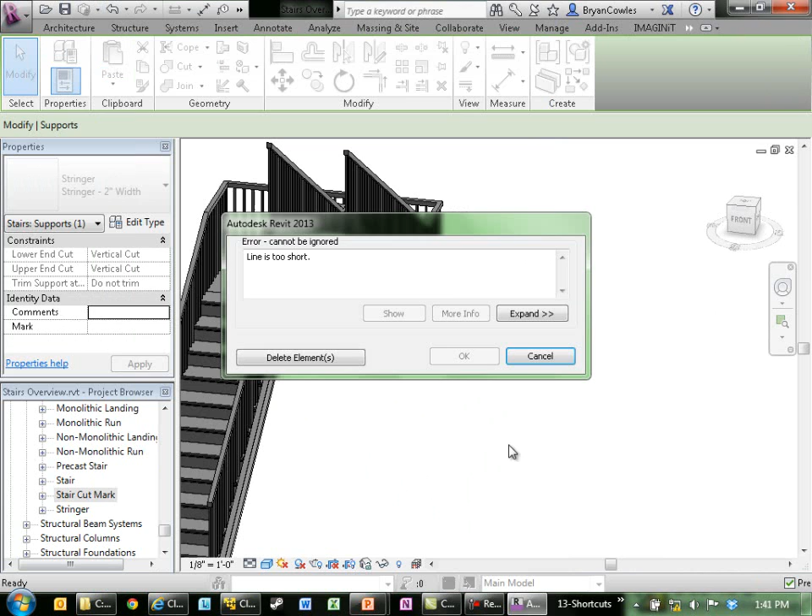And let me switch to my 3D view, because I want to point out - oh, I was playing with this earlier, let me turn this back to the default. So this was the old stringer that you were kind of forced into using.

Now, if I come in here, notice I can individually select stringer elements. Now this is a graphical bug, I'll call it. If I'm in hidden line or shaded, once I select it, it doesn't show me that I have it selected anymore, so I think this is a graphic bug. But I do have it selected, and I can hit delete or select individual entities and just modify them as I go.

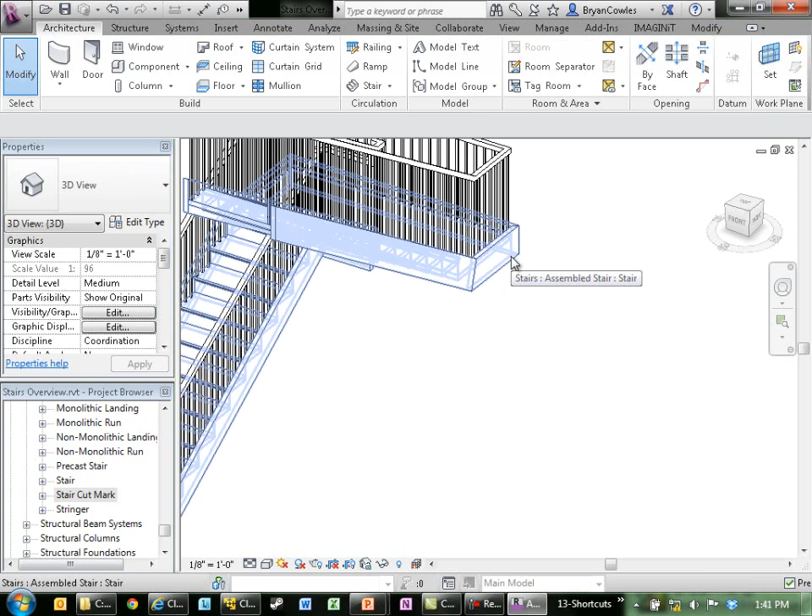I can also go back into my Edit Stairs area. Oh, this is where I want it to do it. So I'm going to select it. Notice I can come in and just individually delete elements. So if I knew I was right up against a wall there, maybe in this instance I didn't need those two stringers, I can delete them off of this without doing anything fancy with a special landing or voids or in-place families. I'm just editing this component right here.

If I delete one and I want it back in, just realize there's this support tool that I just need a stringer there and there to add them back in.

Now, once I finish this and I select an individual stringer object, if I go to the type properties of this stringer, now this is something that's interesting - most of these properties are grayed out right here. So notice I can't duplicate this to add a new custom profile. That's silly, I want to. I'll show how to do that in just a bit.

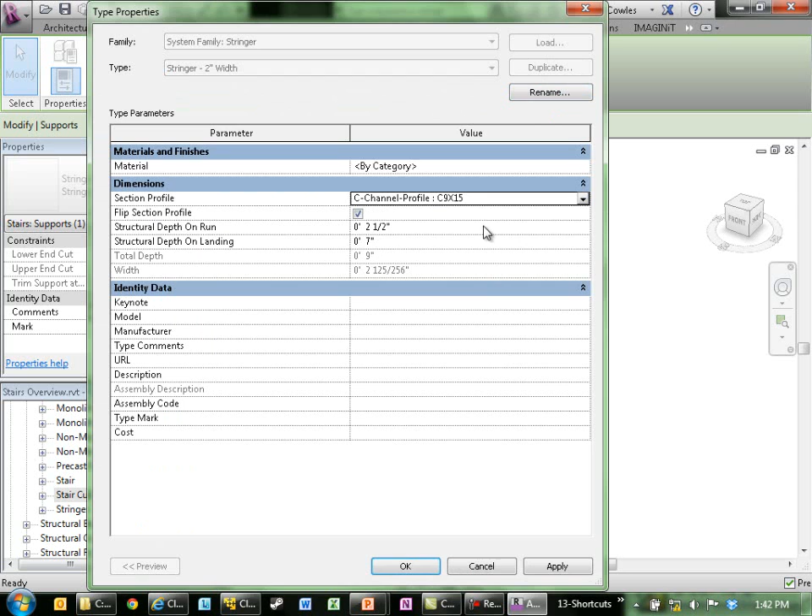But right here is section profile, where I'm going to say I want to bring in a channel profile. Go ahead and hit OK. And now I can actually use a channel as my stringer type.

Notice there is a series of properties in here. So actually, by default, this one is unchecked. I knew it was going to flip, I knew it needed flipped. So if you don't check that, you see it has it backwards. But you've got options in there to flip the profile.

Whoops, I grabbed the stair, not just the stringer. Flip the profile, move these up or down if I didn't get them lined up just perfectly. But ultimately just allow me to really control what profile and where in location this needs to be.

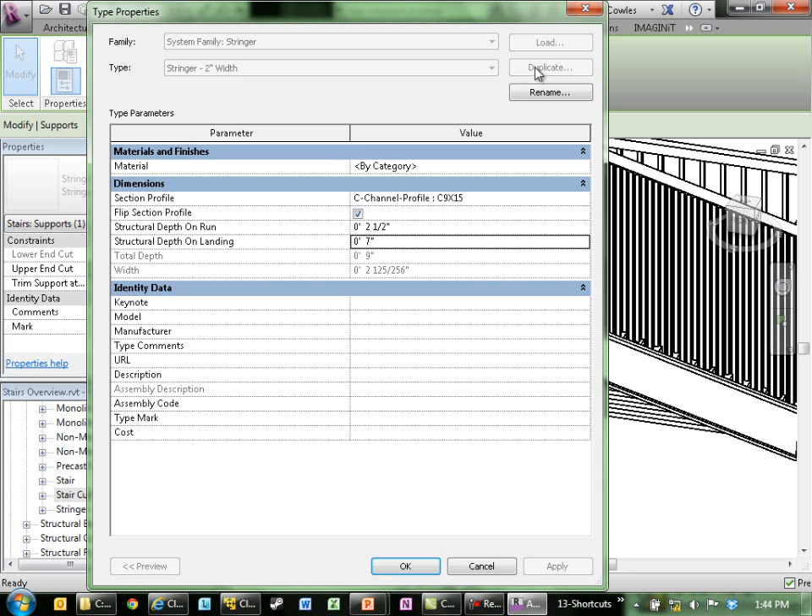Now notice that right now there's just this one type. And if I have two stair types, I need a channel stringer on this stair, but I need a really decorative, fancy wooden one on the one that's in the lobby. Well, you can't just duplicate this right now. This is kind of a silly workaround here, but you do have to go to the family tree to find that. So when I say stairs, right here is stringer.

There's the one that I want. I can right-click here and say duplicate. Kind of silly, I'm going to guess that's another programming oversight. But I'm going to say duplicate. Now I've got this second one that I'm going to call, I don't know, custom wood.

Now I can right-click here and go to my properties. But first, let me load in a custom one. Documents. Oh, I didn't copy these over. There we are, so there's just my stringer profile, just a profile family. Go ahead and hit open.

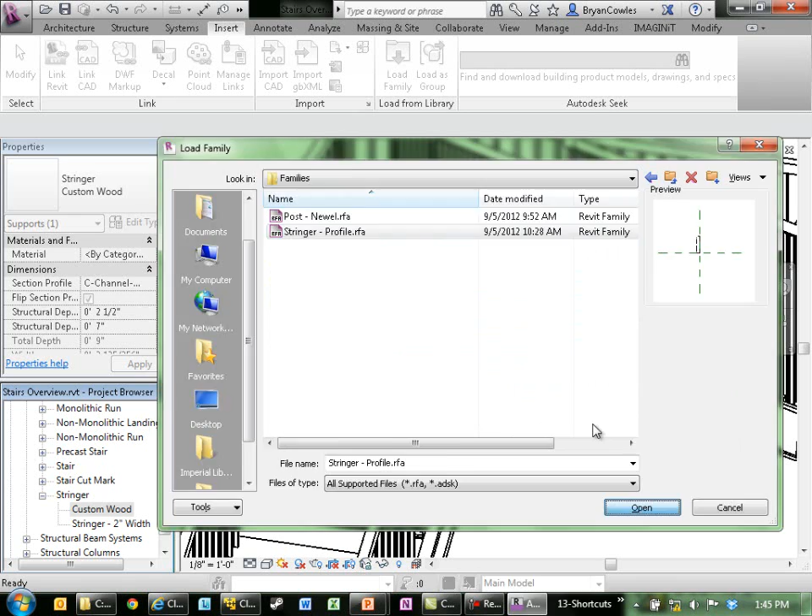So now when I come in here and say, all right, I'm going to edit the type properties of this, I could pick its material as wood. Come right here and say, all right, this stringer profile that I just created is the one that I want. But notice still, it's not letting me do this. So it is kind of a unique workaround or workflow, but I could assign this right here, but it does seem like a programming oversight, like they just didn't put in the ability to easily manipulate this.

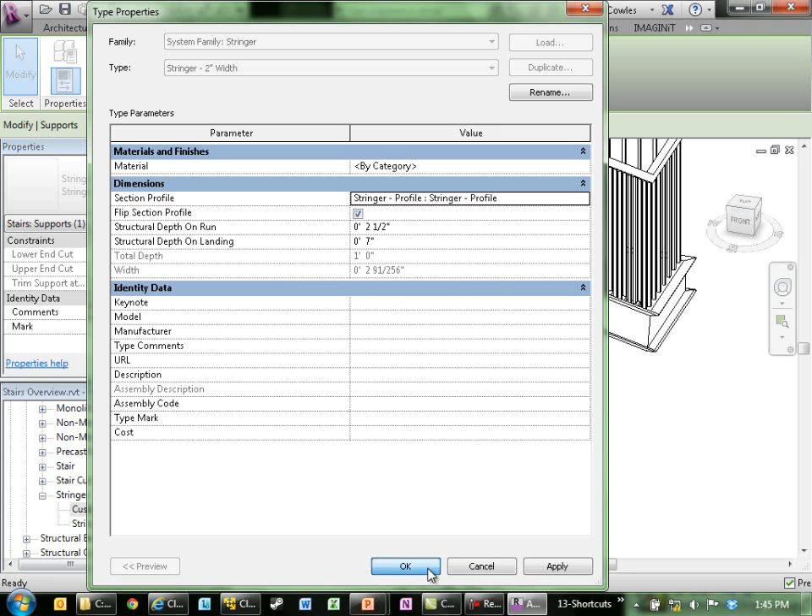So it's part of either the stair type properties where I would adjust this, because I can't adjust the stringer type after the fact. So I would have needed to assign the stringer type before, and now you see my profile is flipped, because it was flipped to match my channel. Now I can just come in and flip it back.

That line too short error. So there again, I see this one here. Now, just to point out, you may not want to put so many arcs in such a simple profile. That can really overload your graphics processor. I did it just to illustrate that point there.

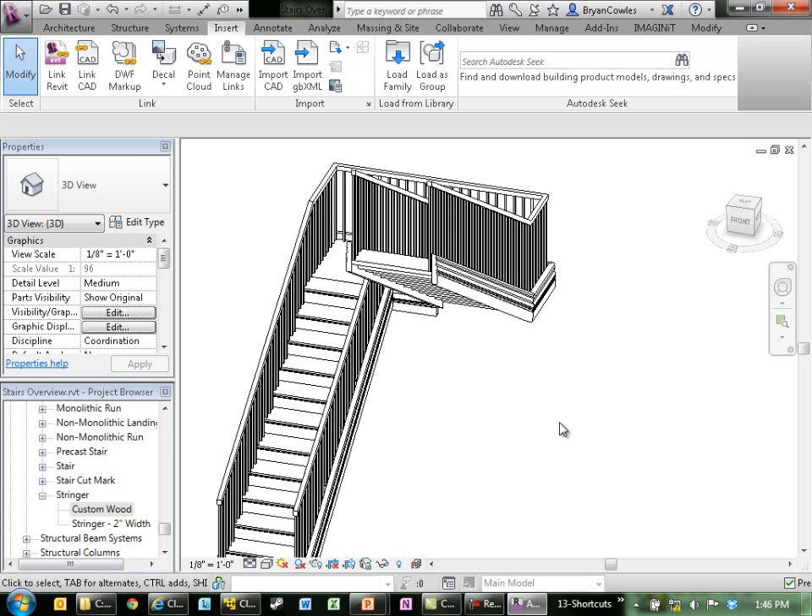But now, just build a profile. Be sure you assign it correctly in your type properties and that it's assigned correctly in your stair type properties. And then you can really start customizing exactly what stringer types you want, what profiles you want to use. So all sorts of good things with these differing objects.

So I'm actually going to take these two handrails and I'm going to swap them out with this pipe guardrail.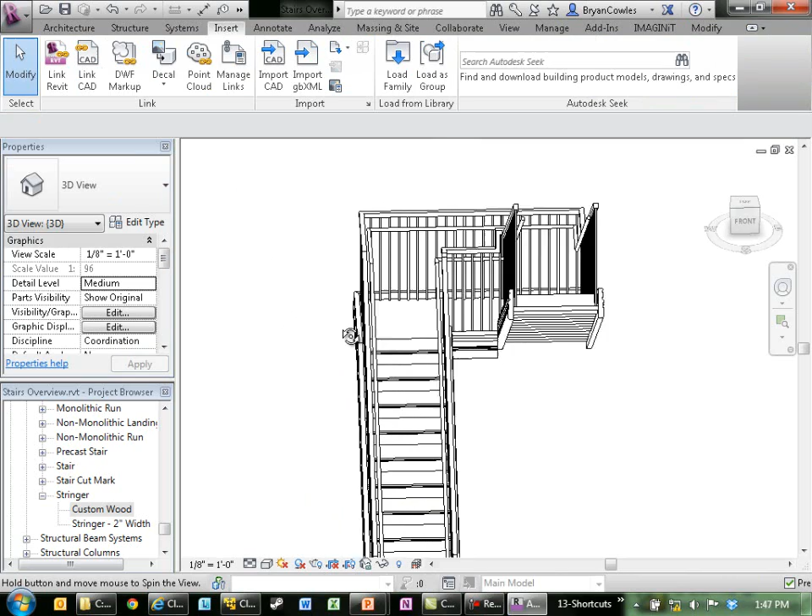Handrails are still a pain in the butt. I've got a feeling that the handrail module, and I'm just hypothesizing here, don't hold me to this, I'm hypothesizing that the handrail module will be one of the next big overhauls. But right now it still uses that kind of archaic table and patterning technique to get handrails. Now if you're only doing balusters and rails, it's not too bad. But who here's tried wrestling a handrail that's panelized?

Oh, that's a headache all in itself. I spent a good amount of time a couple years ago showing a bunch of tricks on that. But that can be a nightmare, and it still is, unfortunately.

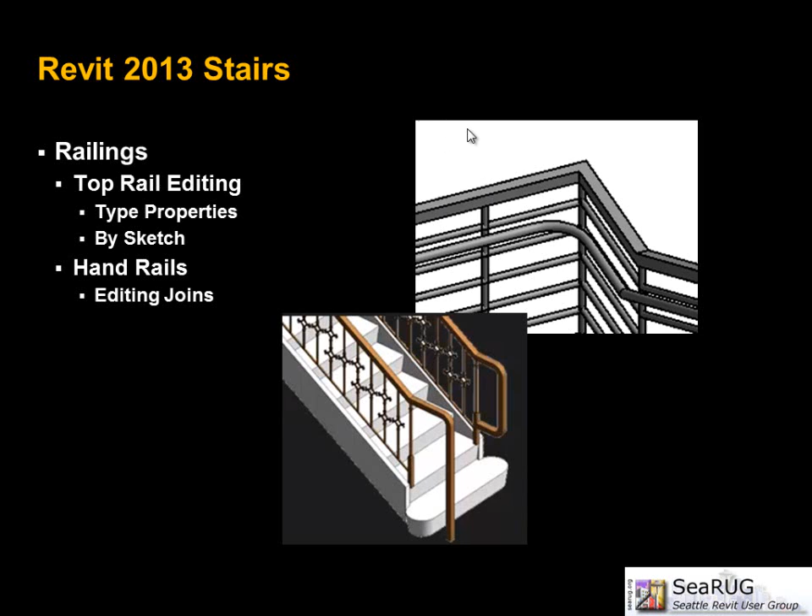But what they made a lot easier is editing the railing portions. The balusters and panels are still using the old techniques. But we can come in and start editing specific parts of these objects, the top rail and any handrail item. And this can be done with simple tab selection and tab editing.

So first, if I hover over this, notice it wants to select the whole handrail first. But if I hit tab, notice I can select just the top rail or just that handrail. Now I have some really handy manipulation tools here.

So if I know I need to add a rail return, which, hey, that's code, I need to do it on almost every stair I ever draw. Doing that previously, I'd either have to add an extension line or make a custom post family that I would add to the end. But here, I can grab this rail and come up here to type properties, and notice...

There's this extension areas. So I've got a couple of different extensions, at the beginning or the bottom, and the end or the top. So if I wanted the bottom to have just a return rail, comes down and comes back upon itself, I'm going to say the extension style, I want to be a post extension style, and it's kind of a weird term to use. And then I can say, how long do I want this?

So I'll say 12 inches. I can add in a tread depth if I wanted to. I'll go ahead and hit OK.

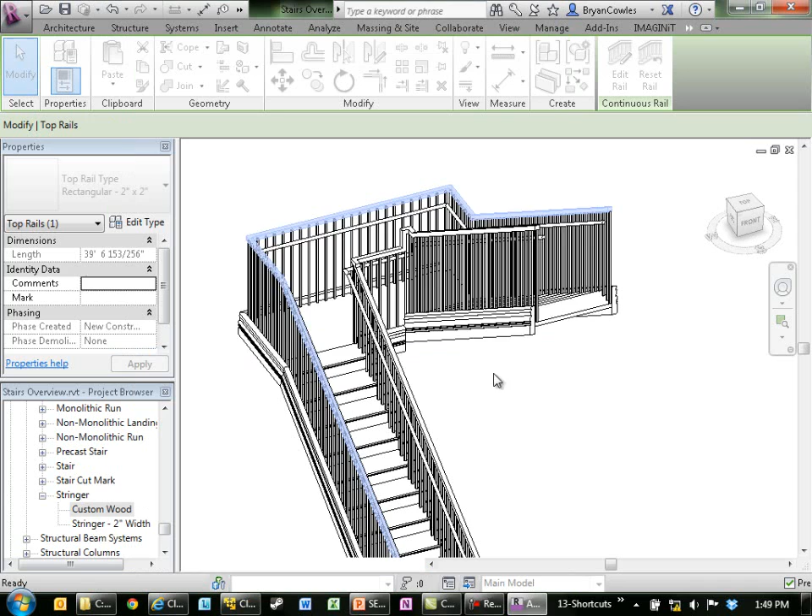It gave that 'line is too short' error, but notice it just went in and added that return rail for me. The default return rail is rectangular in shape, but I can come in here and edit that to make it whatever I want.

Another thing I can do is set the top extension style. Maybe I want this to do what the one at the bottom is doing - just come in and go straight to the ground. This is where I can set the extension style to 'go to the floor.' Notice there's also 'go to a wall,' so if I needed it to turn into a wall, I can do that too. I'm going to say go to the floor.

There's a new family type in here we can use. This one's not a good example since it doesn't have a little plate at the bottom - right now it's just going to turn the rail down and put it right to the floor. But if I know I had a little plate or some object down there, I can set the bottom termination. There's just this default one, but you can customize these. I just want a little wood termination at the bottom, and I'll hit OK.

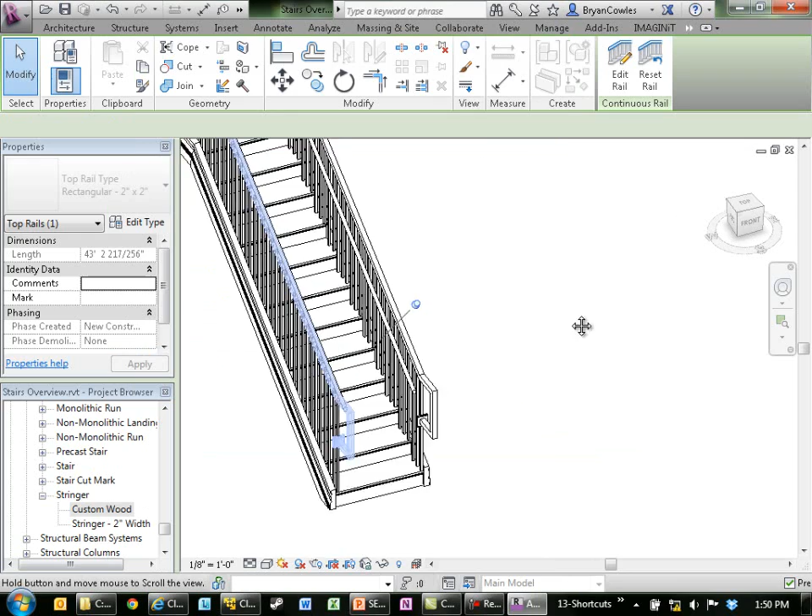That stupid 'line is too short' error again. Wait, did I edit the wrong one? Whoops, so let's back that up.

So I wanted this rail here, and I wanted the top to go to the floor, and I want the top termination to be wood rectangular. So there you see - it turned the rail down, stopped at the floor, and added in that little wood block at the bottom. And again, that's something that can be customized and edited.

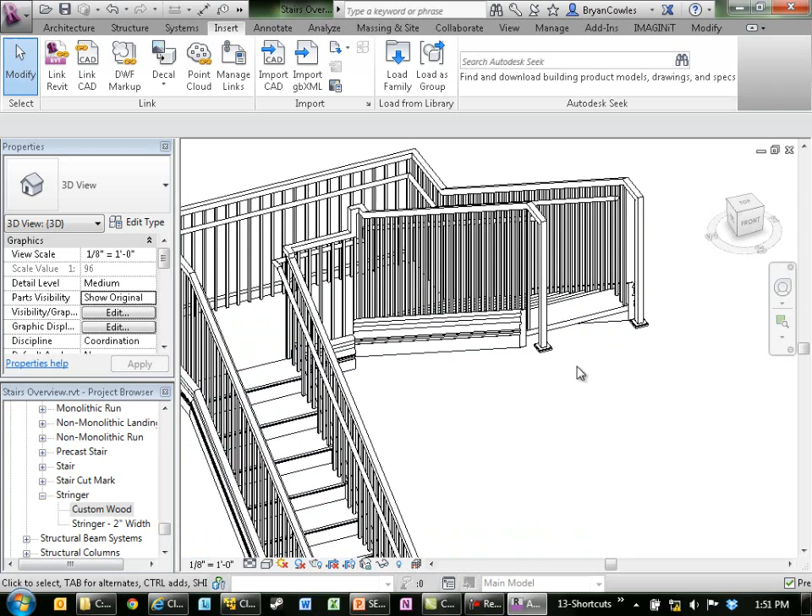Now, like I said, it defaults all of these to squared corners. What I can do is hit tab to select that, and I can edit this rail further. Notice this is a different looking rail sketch - it doesn't look like the purple lines we're used to for the whole handrail. This is just the sketch for that top rail. So I can edit the specific path for this, and I want to use an arc.

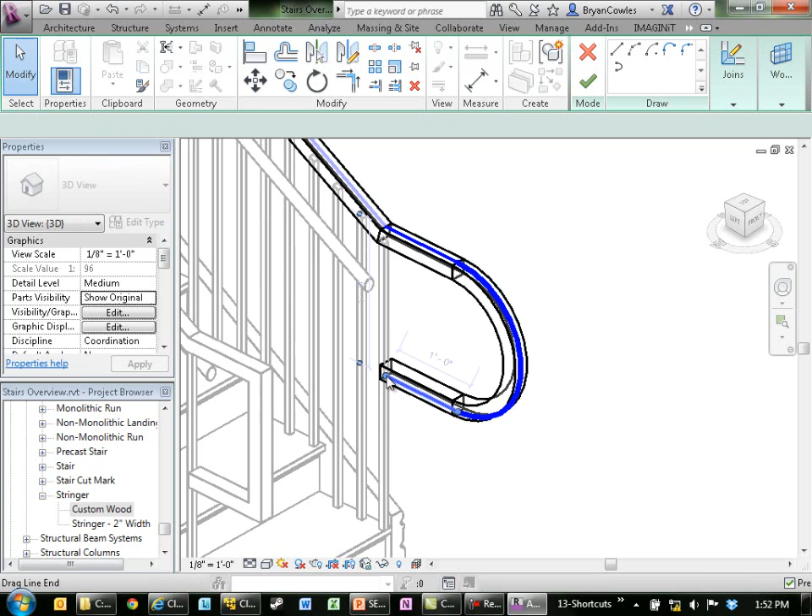Whoops, let me try that again and delete that piece in there - it was trying to join them all, so I deleted that little vertical piece. And there you see, it's just a matter of manipulating the lines to look exactly how I want it. I can grab this and maybe pull this back, grab this.

You know, don't copy my designs - they're copyrighted.

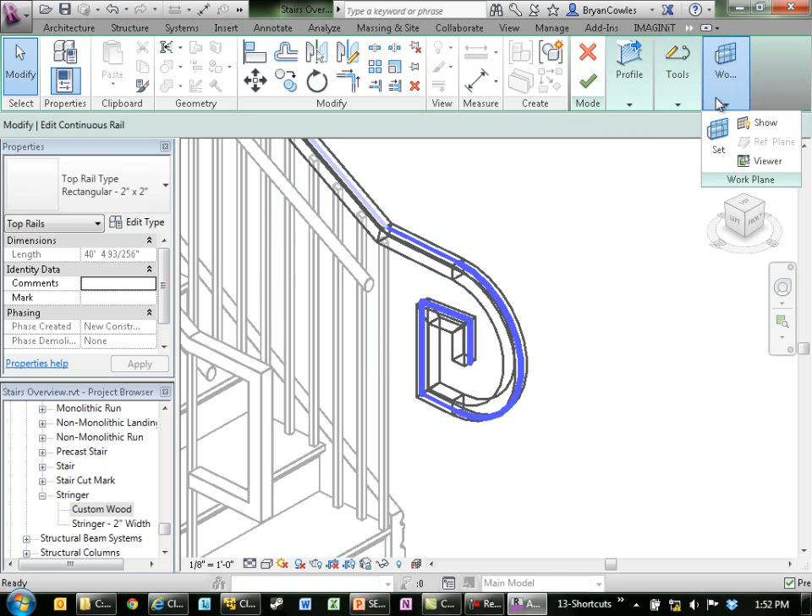But it's as easy as that - you just grab it, tell it you want to edit the sketch that's driving it, and just start sketching it. Another thing I wanted to point out, since I'm running a little short on time, is that you can change your work plane as well. So just something to consider if you need to edit this geometry.

Last thing I want to show is, in a situation like this handrail, I wanted that corner join to not be a miter corner - I want it radiused. So what I can do is a similar technique, and I could do this on the handrail or the top rail. If I say I want to edit this rail, and edit the path, there's this tool right here: edit the rail joins. This is specifically for corners.

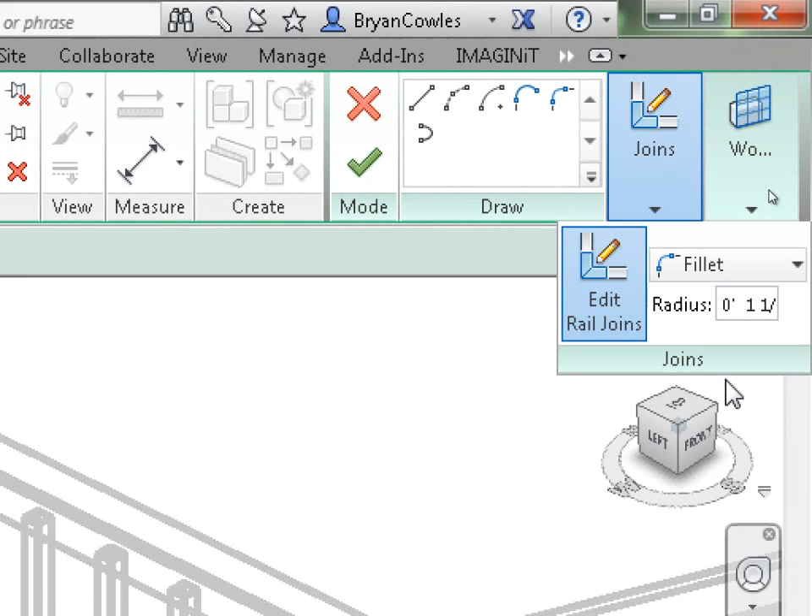So I say I want to edit how this join looks, and don't be confused that it puts the endpoint snap on there - it's just letting you know that's the endpoint we're editing. I can come up here, and there's a little pull-down where I can say, by type, which is driven by the railing itself, or do I want to miter this or fillet this? I'm going to say fillet with a 6-inch radius, then hit finish and finish.

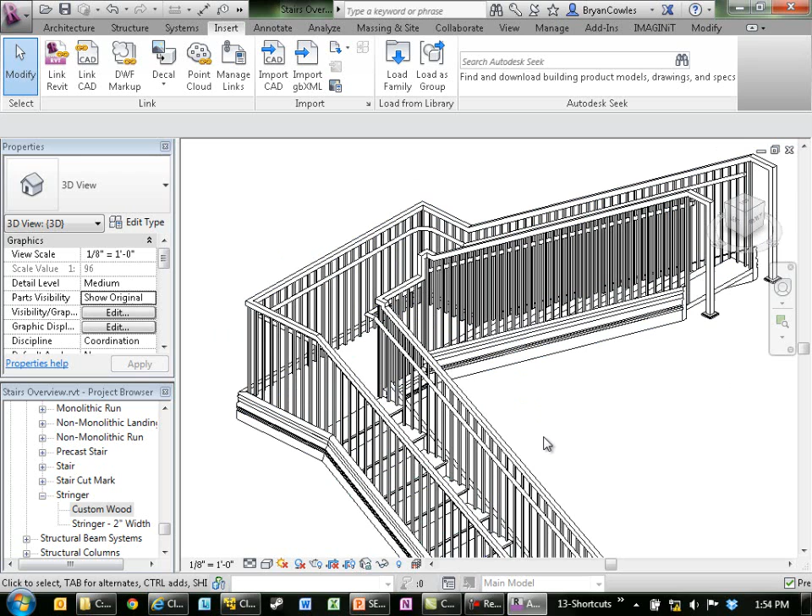Again, these are very nice tools to manipulate just little parts of the rail or the entire rail. So as you see, we're getting to where all of these objects are becoming more individually based, so they're easier to edit individually. Like I mentioned, doing balusters and panels is still a pain in the butt - hopefully we'll get an update to that in a future release. But we're getting there; these are a lot easier to manipulate, customize, and make how we want them to look, how they're actually built, instead of some of the goofy logic that was in the old ones, as well as manipulate these how we want.

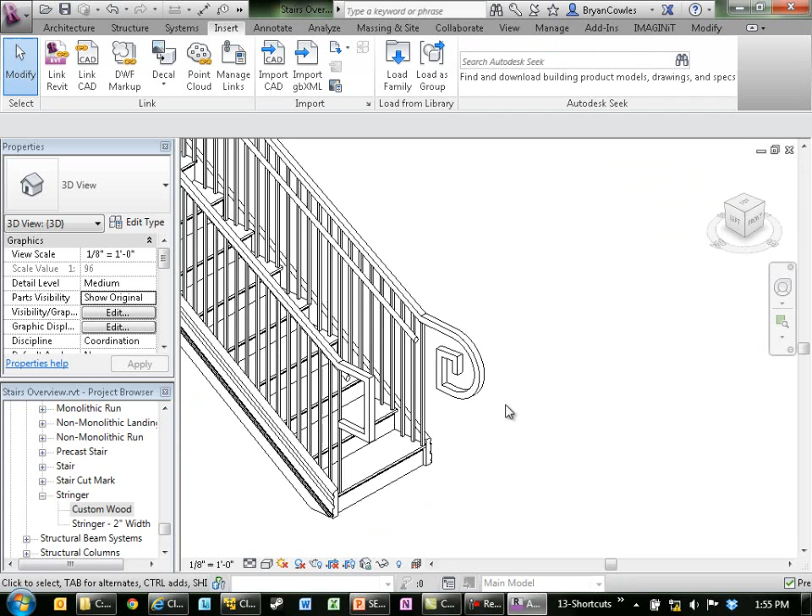You got one way in the back. Can you edit the path of the handrail, like you edit the path of the top rail? Yes, absolutely, it's just a matter of what you're selecting. If I pick the whole handrail and say edit path, this is just like it's always been, so I can edit the path how I want. What I was doing is making sure I get on it and hit tab, tab, tab. I only selected that one piece of the handrail, not the entire system.

When you were doing the join on the handrail portion using that fillet tool in the corner, could you alternatively do that by editing simply the sweep path of that handrail? So the question is, could I have done this arc on just the handrail piece instead of the whole rail? Yeah, I would have just edited that purple sketch that I just showed. So when you edited the top rail and modified the sweep path at the end to give the curlicue, do you have that same ability on the handrail?

Not as detailed as I was able to do with the top rail, but the functionality is there. It's just a matter of how you draw the sketch and what work planes you're working with.

One more question, we'll go right here. If you're doing something like a custom steel T-section center stringer, when you draw that custom profile, do you need to do that in a separate family, like when you load it? Yeah, so that profile I brought in was a separate family. I went File, New, Family, picked Profile, sketched it, and loaded it back into the project. Okay, so it's just a profile family.

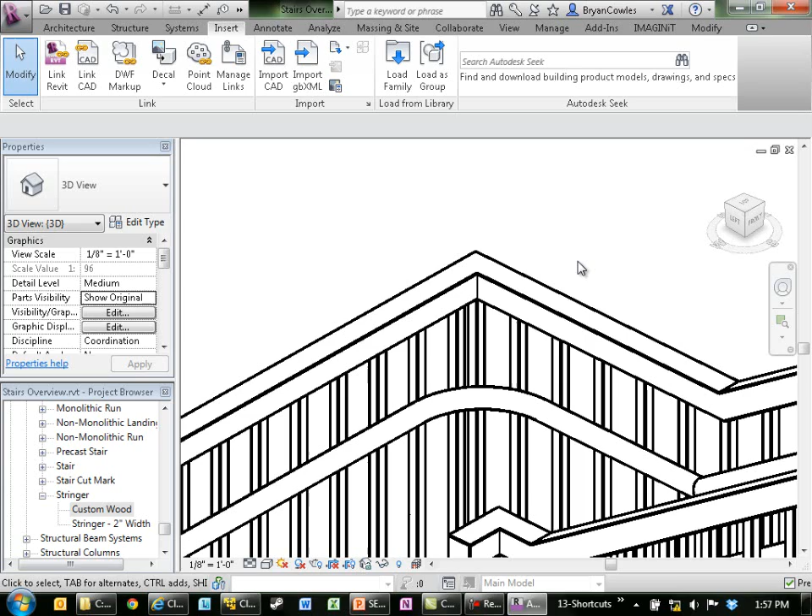We'll do one more right here. Putting in an intermediate handrail, the stair tool by default adds them to the sides. If I wanted an intermediate handrail, what I would do is just go to the handrail tool. The first thing you need to do is pick the host that you want - this needs to be going on this stair. Now, when I draw this, it's going a bit slow. Chain, and continue that through. There's not going to be much room to walk up that particular stair, but yeah, I just use the handrail tool, say this is hosted on the stair, and just draw it right where I want it.

All right, okay, I'll be here with more questions if you need them.